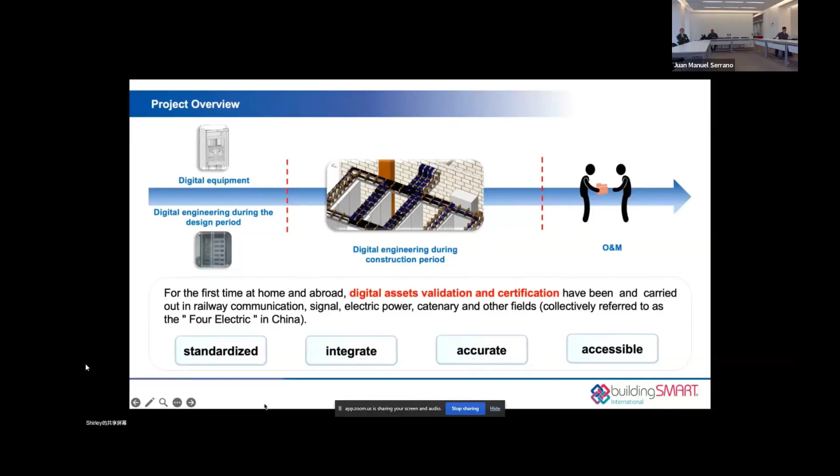As I mentioned before, standards are the core element, so our pilot project is based on various standards such as the ISO 19650 series standards, ISO 16739, and other openBIM standards, and also national standards.

Now let's move on to the second part, openBIM outcomes. Our pilot project has brought four main outcomes.

First, we established a digital assets validation and certification system. Second, we digitized a series of standards to facilitate the detection of digital assets. Third, we developed a validation system supporting automatic validation of IFC format models and information. And last, we developed digital assets handover and application based on the COBie standard.

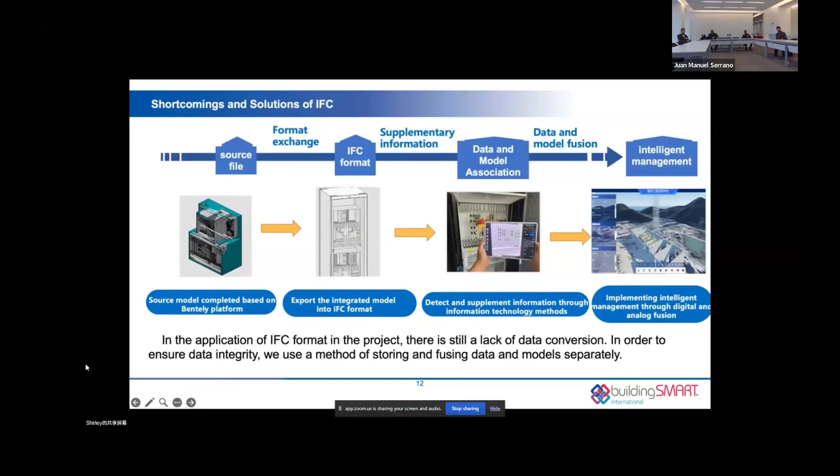For the second outcome, we have digitized the standards within the system. We organized the standards for entry and developed standards management software. This software is authorized by the NCA. Digitized standards are the basic core of the validation system, and this helps develop the automatic validation platform.

Yes, that's how it works.

We have already extended thousands of entries in 4 standards. These extensions perfect our standard system. And here are details of the entries we have digitized.

Well, the third outcome. Here we use IFC format as transmission format, transferring other format models into IFC. After that, we have developed a digital assets automatic validation platform based on IFC standard. This validation platform consists of laboratory and on-site.

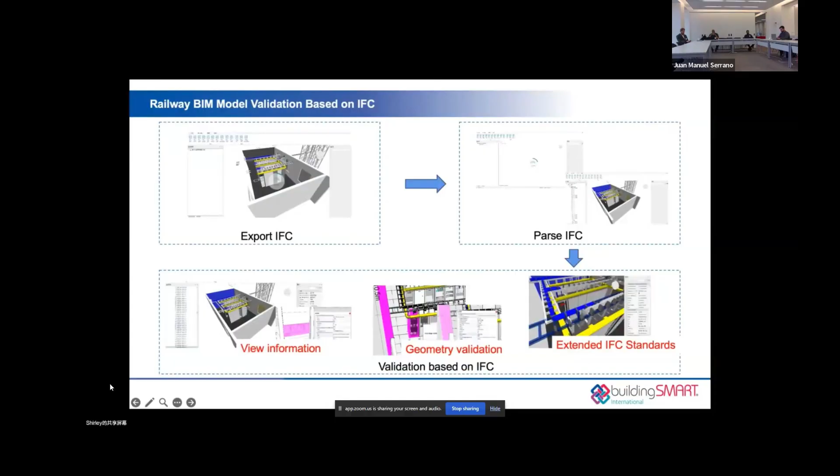Self-developed IFC model parsing function extracts the data information to be detected from the IFC format model. After parsing data from the IFC model with our detection function, we detect this data and provide the inspection report.

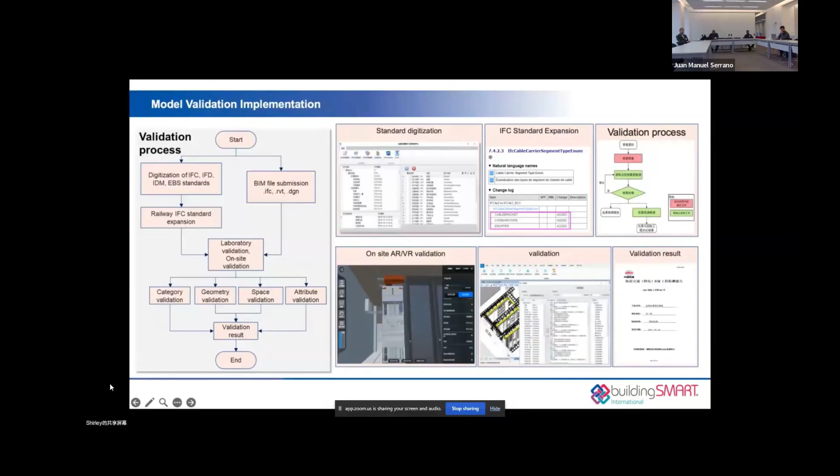Here's a flow chart of the validation process. There are 2 validation platforms, laboratory and on-site. Through these 2 platforms, we can detect digital models in 4 dimensions, such as category, geometry, and so on.

In this pilot project, we have validated and certified 4 digital engineering and 4 digital equipment, and these results are all approved by the Chinese government. These pictures show the results we've achieved.

Now let's move on to the handover and application. This is the handover process chart. When the owner initiates a commission, the certifier and validation party will help the owner detect the certified party's digital assets. Through this process, the certified digital assets will be accepted by the owner.

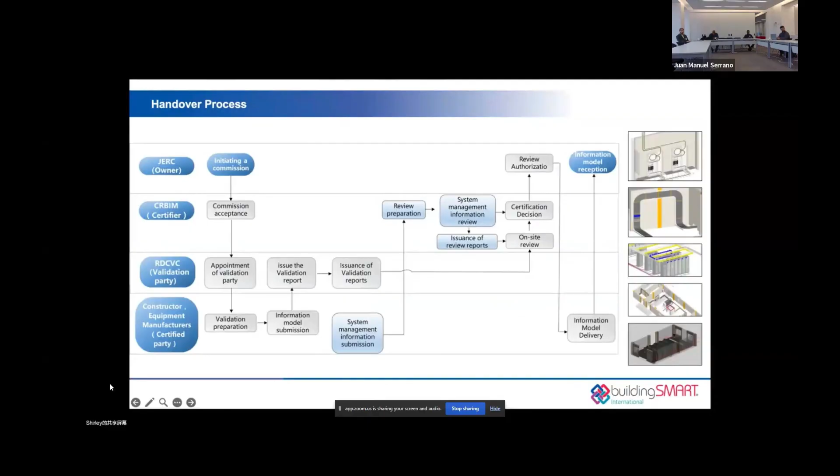In this pilot project, as delivery of digital assets, there are not only digital models, but also 56 digital engineering model drawings, and over 80,000 pieces of digital asset information included. This innovative delivery set helps engineers get key requirements or information more efficiently and accurately than in the traditional way.

So based on the certified digital assets, we have developed an electricity O&M management system. Many functions have been developed. Maintenance personnel can check relative digital data and manage equipment through this system easily. It reduces the cost of device management and improves efficiency.

In addition, based on COBie, static and dynamic data are all related to digital assets, making data visualization possible. Thanks to AR and VR technology, we developed an on-site validation system, and this system also helps our construction and maintenance personnel check hidden engineering easily.

And that is all my sharing.

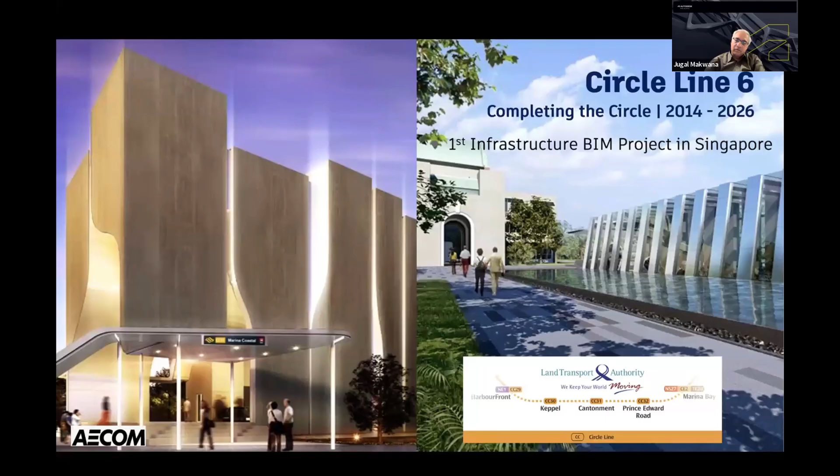Over these years, I've had pleasure in working on some of the largest projects. One of my first interesting BIM projects was way back in 2014, a project in Singapore. It's a small underground metro project with three new stations, but one of the most challenging projects in a way that the sheer complexity that the project had in the underground utilities and the stations, and the fact that each of the tunnel segments were different.

Getting a lot of feedback. Sorry, we had some feedback, but we've muted the source. Perfect, perfect. No worries. Thank you.

Although let's say it was only a 3 kilometer project with three stations, it had close to 110 models, and the information modeling and management was being done in 5 different countries. So quite an interesting challenge.

One of the largest probably was the Singapore Malaysia high speed rail project with a huge station at either side, and then a significant linear infrastructure as well. So this rail project is very complex. Like when you're building a station, you're building a kind of a mini township in itself.

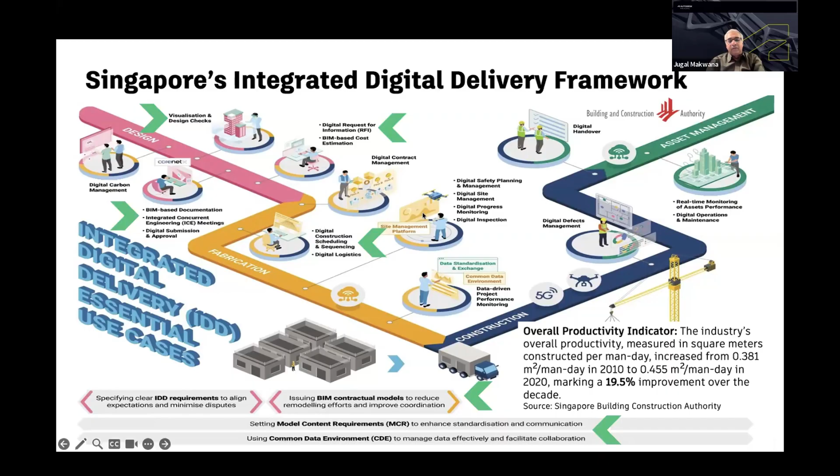All of these were kind of interesting pointers, which I took into the transformation program that I was leading in Haskoning, a consulting firm headquartered out of the Netherlands, where we said we have to make the ISO 19650 as the standard. One of the core principles in the organization's journey was having open BIM and IFC integrated as a core principle in the transition. That is where we feel that it adds value.

Back in 2014, I must confess that IFC back then 2x3 did not have the kind of support for linear infrastructure that IFC 4.3 currently has.

Some of the things, and I'm sure many of you would be living through this, what we see from a rail perspective, it is a unique discipline when compared to others, because in rail our different disciplines see things differently. Some see in geometry, some see in schematics, where drawings are still the kind of default currency in majority of the world. And that is where information modeling ends up being purely a model standpoint, not an information model that we want. And because of that, there isn't a lot of consistency in the way how things are done.

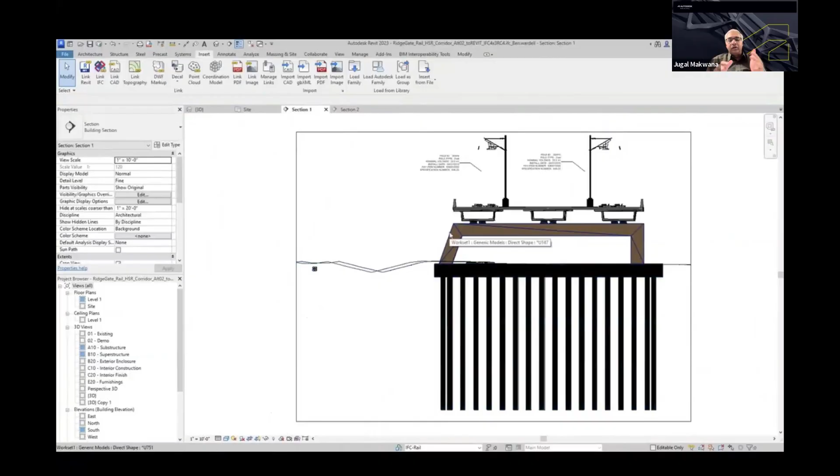Because you have that information in Revit or Civil 3D, you can use it from an annotation perspective or extract it for documentation and reporting. IFC also supports much better geolocation, which can be used to better coordinate the linear and vertical assets - the track as well as the stations and everything else. The support for openBIM and the standards goes beyond Revit and Civil 3D, but also ACC as well as Navisworks.

If you look at the typical IFC or openBIM workflow, this is what it looks like. With the openBIM workflow, IDS is where you define what information you need. IDS is kind of a digital version of the BIM execution plan where you capture things at a granular level. Then you use Revit or Civil 3D to create your data, which can then be exported in IFC or whatever form you want.

You can also use Navisworks and BCF to review, and then use ACC or even Forma to deliver what you want, either as IFC or a native format. Someone earlier had a question about how to validate. Building Smart also has a validation service, where you can validate if the IFC has the information that you need.

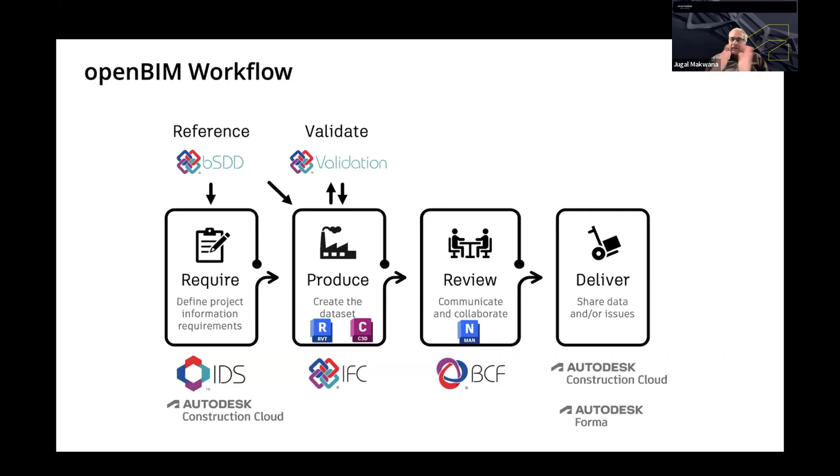What's also interesting is that it's not just what Autodesk is doing, but because of ACC being a wider platform, some of these integrations have also expanded, and other partners are doing some of that integration. Let me just play this. This has audio, I'll take a pause for a second.

OpenAEC for BSDD is a plugin for Revit and Civil 3D that allows you to connect to a BSDD. Once applicable objects are selected, insert your desired IFC entities, attributes, properties, and property sets. This free plugin allows you to easily manage properties in the native model and set up model parameters for predictable export to IFC. It maps IFC properties and Revit parameters by automatically authoring a shared parameter file. The same workflow is also available as a plugin for Civil 3D. OpenAEC for BSDD also allows you to enforce data requirements defined in an information delivery specification file to native models. Set the import target by selecting the applicable Revit objects. Set the properties and attributes defined in the IDS before automatically creating a shared parameter file and importing.

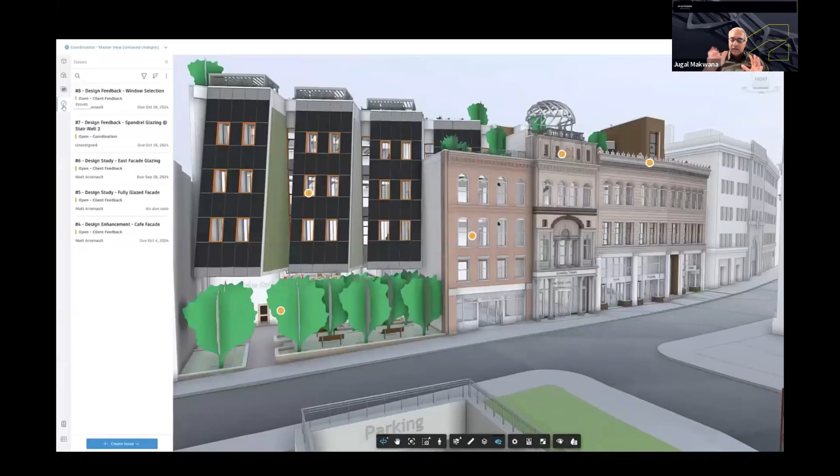This is one of the plugins available for ACC where you can create a BSDD as well as an IDS, which can then be used in validation.

This is an example of how BCF has been integrated with ACC as well, where you can export BCF, which is a coordination standard, and use that within ACC to bring in information from multiple disciplines and multiple technology sources using BCF.

So these are some of those examples, and Autodesk in a way has been one of the founding members of Building Smart International. We are still strategic advisors and a strategic member of Building Smart International, and our support for the openBIM standards is widespread, so 2x3, 4, and even 4.3.

What's interesting is that some of the newer platforms like Forma, which was announced earlier at AU, already supports IFC and openBIM standards. What we are working towards is to ensure that everything you do provides the right quality, is flexible, and is consistent, not just locally but globally.

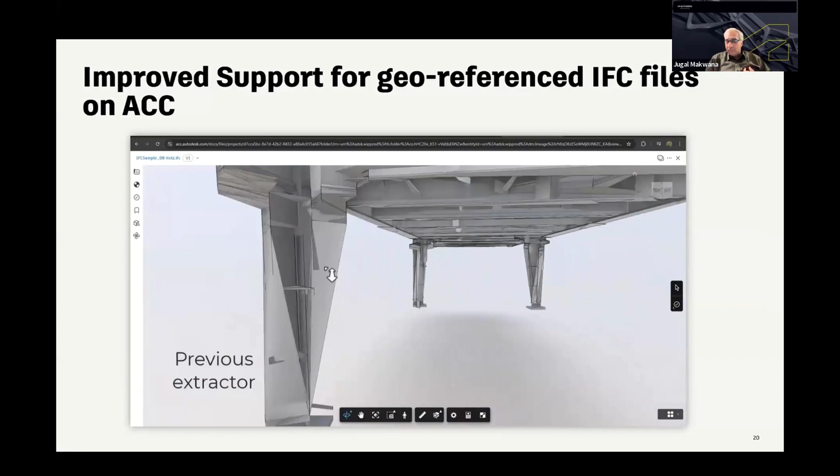They're also looking at improving the quality. So this is the IFC extractor, which was 2x3, but with 4.3 and the additional georeference support it has, the newer IFC and support in ACC is much better. You can see the difference in the way the extractor delivers and the quality you're able to achieve. The speed again is much faster, and there are significant enhancements being done.

There's a whole presentation which was done at AU on openBIM workflows for Autodesk, which is most likely available on one of the Autodesk portals for you to see, and I'm happy to have a deeper dive with the technical team on how some of these things exactly work.

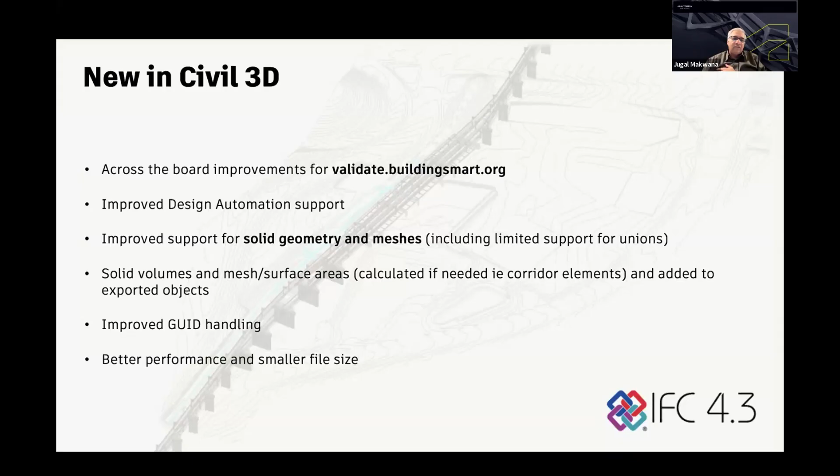There's also significant investment in IFC from a Civil 3D perspective. You should definitely explore the validation platform that Building Smart International offers to check the IFC you're getting and its quality. I think Civil 3D and Revit are likely to be among the first platforms certified for IFC 4.3 and the way they handle it, and some platforms like Forma already export IFC 4.3.

And imports as well. So if you're using Forma and want to import an existing model, you can actually bring in IFC as well as Revit. And the roadmap kind of continues, with a lot of enhancements and developments likely to happen.

One of my colleagues, Angel Velez, who's a fellow at Building SMART International, is responsible for implementing IFC in Revit. He's also now part of the standards committee, driving to ensure that the interoperability and integration of IFC is by design and a lot more proactive.

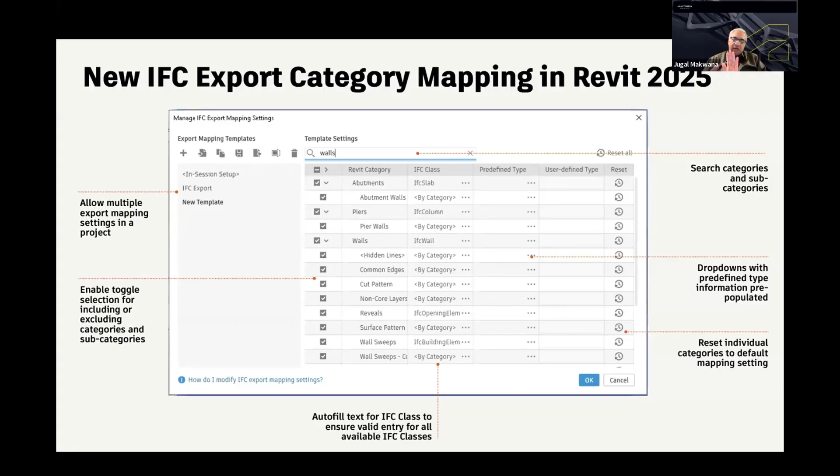So you should see more features and functionalities which allow you to do category mapping in Revit through Excel and the data dictionary, as well as provide a custom property set so that, for example, your overhead line would have a custom property set, your track would have a custom property set. You can start modulating and adding those custom property sets to elements so it doesn't become one monolithic document.

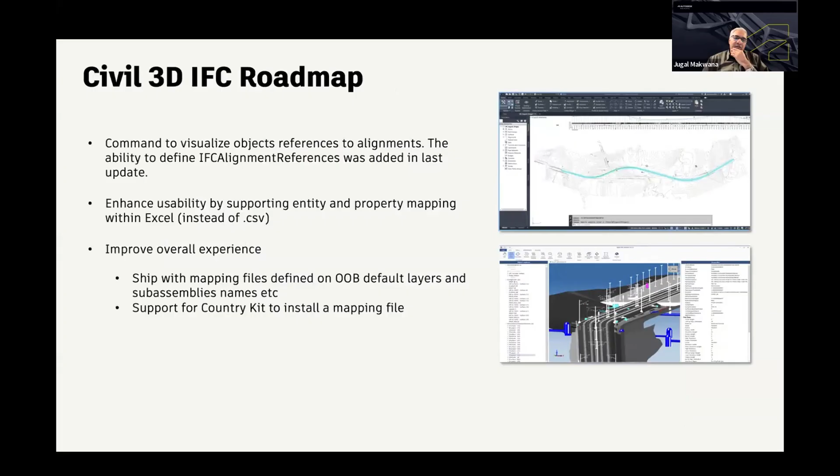There are lots of interesting things happening. There's also support for Excel-based mapping that's coming, as well as country kit support. And now available on all ACC projects is the data exchange, which can help you granularize the IFC.

So let's say you get a whole monolithic IFC with all the disciplines in it, but you say, okay, I just want to create an IFC which has my tracks in it. You should be able to do that with the data exchange and say, can you extract all the tracks and package it as a separate IFC? So you can do that.

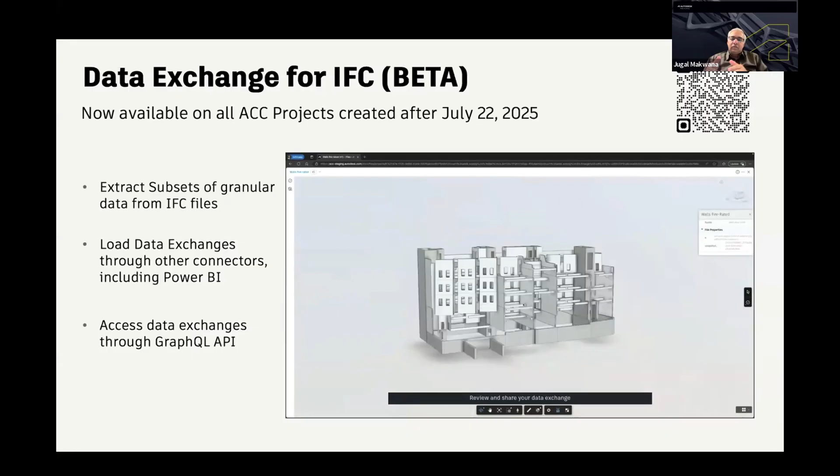In this case, let's say they're doing it for structure or mechanical. You can actually extract and create subcomponents of those IFCs, which can have that dependency, and then use it in whatever technology you want—bring it into Revit or Civil 3D, whatever you want to do, you should be able to.

One of the pivots Autodesk is now focused on is ensuring everyone has access to that granular data, and that's where the whole AEC data model is being configured, where the data dictionary or BSDD is also one of those foundational pieces that offers custom Revit properties embedded in the AEC data model, where you should be able to assign additional properties.

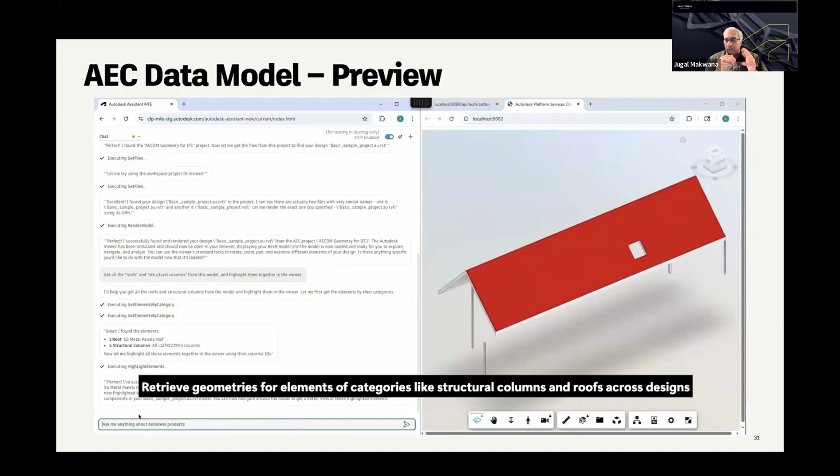With the advent of large language models, you should be able to, within ACC as well as Forge, with the Autodesk Assistant, have a conversation with your models—whether those models are in IFC, Revit, or Civil 3D format. You should be able to have a conversation and use it to check and validate, does this have these properties, or what properties are missing? So there are additional ways to interact with the information model, and then again export IFC.

Instead of doing it through the UI, you can just type and say, can you extract this? So there are lots of possibilities that granular data brings in, and that's what brings us to IFC 5.

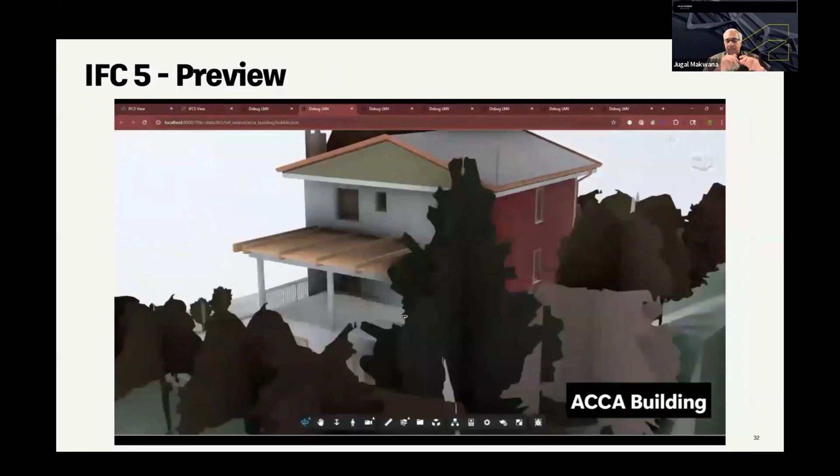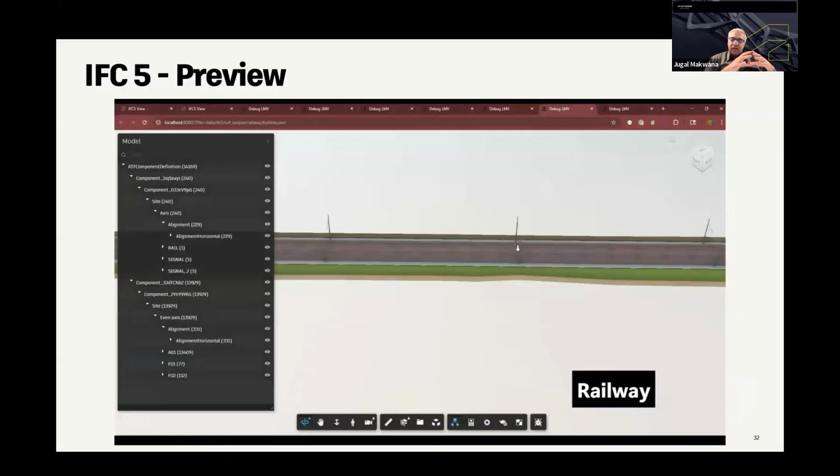IFC 5 is a more granular, cloud-based data exchange, based on IFC 4.3, but modular, allowing us to exchange data on the cloud without actually having to create an IFC. That's quite exciting, and should become the norm for cloud-based collaboration going forward. For desktop-based work, when an owner needs an IFC as an exchange for archiving purposes, that would still be available.

And all of that leads to the whole AI side, wherein once you have that granular data, you should be able to use one of these assistants to query them—say, can you help me analyze this track alignment, does it comply with the New York MTA standards? You should be able to do all that validation and then export and import IFC or whatever. There are some very interesting functionalities being enabled, and granular data is at the core of it. IFC and openBIM will play a much bigger role than what they're playing now.

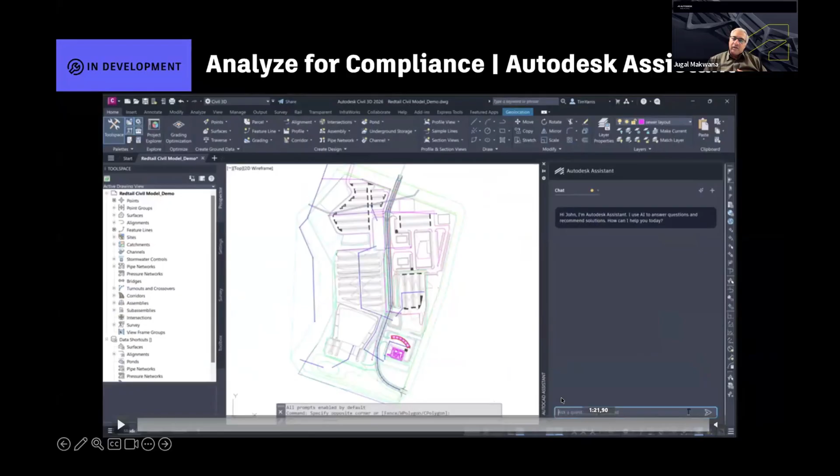So whether it's for compliance and checking and all of that, there's some very interesting developments likely to come. One area is point cloud - IFC doesn't support point cloud and doesn't need to, but there are AI and machine learning capabilities available in ReCap that can now extract rails, create your gauge, and understand your cant, which can then be directly brought into Civil 3D. These are aspects of strategic model delivery or information model delivery from a rail perspective. Once you have this in Civil 3D, you can export it as IFC for sharing with the wider stuff.

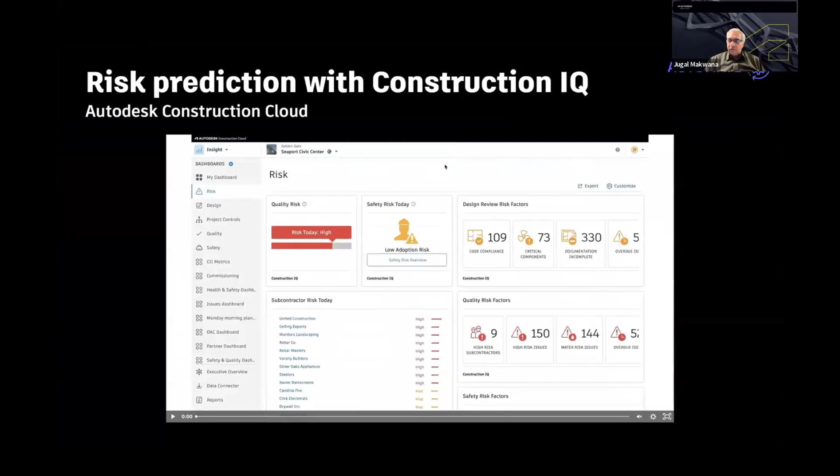There are lots of new developments and enhancements likely to come from an MCP perspective for Civil 3D, which would help further integrate and interrogate these models with other tools and technology. A lot of these enhanced, interesting developments are likely to be based on granular data. If you have IFC, you can bring it into ACC, put it in those specifications, have a conversation with it - understand risk, and a lot of that can happen. The bottom line is we are transitioning from static file-based collaboration to granular data-based collaboration, and you should see more tools and technology enabling that data-driven interoperability.

And it's not just interoperability from an IFC perspective, but there are other standards - OGC as well as ODA, ISO. I'm actually speaking at DEXPI, the data exchange in the process industry, where they're looking at integrating BIM and process work. So it's not just IFC on its own, but the whole open BIM workflow, as well as connecting OGC, the geospatial standards, with our BIM standards, so that from a rail perspective both are equally important. So the GeoBIM integration is also important.

All these organizations, whether Autodesk, Nemetschek or Bentley, are investing in cloud-based platforms, so we need cloud-based collaboration and interoperability mechanisms too. Going forward, all of these platforms will be open and extensible, becoming more data-driven, giving you the flexibility to unlock the whole data and its granularity, and use AI and invest in standardization and visualization of all of that. In future, as we transition from a document to a data-driven industry, we need to look at how we make it accessible, connected and usable, and open BIM and IFC will be an integral part of that journey.

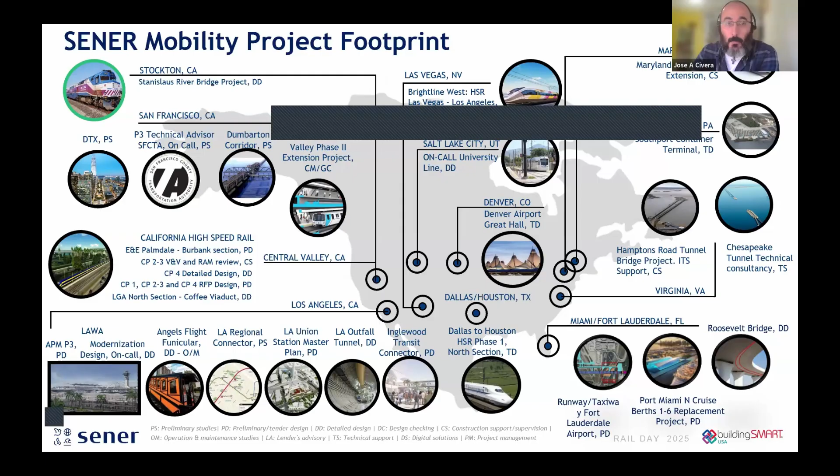Okay, if we talk about BIM implementation, well, we have been working with BIM tools since 2008, but only for modeling until we reached 2012, where we had BIM model development at a higher level. Then we moved into BIM management in 2014. And in 2017, we started BIM implementation with the creation of the SENER BIM office. Also in this year, we joined the Building Smart Spain chapter.

We are partners on the Building Smart Spain chapter, with several collaborations and participation in some of their activities. We have experience with BIM data management and system integration. In 2022, we were certified in ISO 19650 as lead appointed party. In 2024, we implemented ACC as our main CDE for the projects, and when we can decide the CDE, it is the one we use. Then in 2025, we recertified our ISO 19650 certification, now as lead appointed party and appointed party.

Now that you know us, I will introduce our client in this project. Our client is ADIF, the Spanish Railway Infrastructure Manager. ADIF is responsible for the design, construction, supervision, and maintenance of the rail network in Spain, and is one of the biggest public companies in Spain for infrastructure.

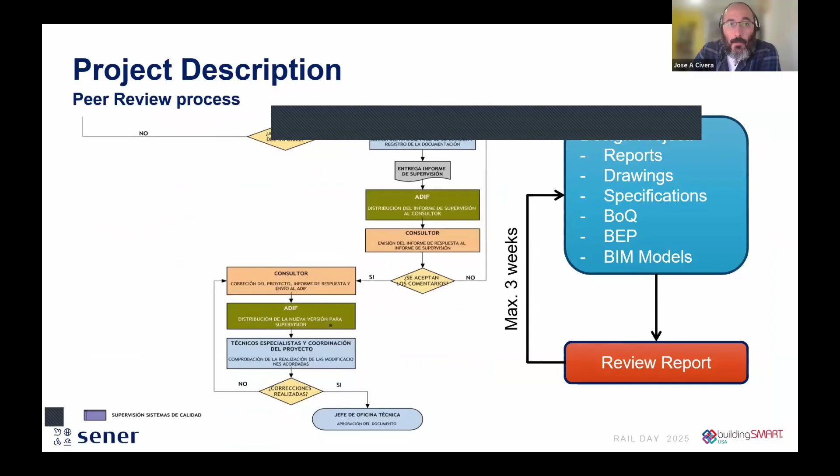I don't want to get into much detail, but this is a short sketch of the different steps during the revision. Mainly, we receive a design project with report, drawings, specifications, BOQ, a BIM execution plan, and BIM models. We have to review it and provide a review report back to the suppliers.

Moving into the BIM deliverables review: part of the project is the technical review done by the technical team, and part of the peer review is the BIM deliverable review done by my team.

First, we receive from the supplier the first version of the BEP, the project, and the exchange information requirements used for its development. We must account for the fact that ADIF is in an implementation process and their standards have improved, so we need the specific version of the standard used to prepare the BEP. This documentation is shared with ADIF, and ADIF shares it with us on their CDE, the ACC, where we check if the documentation is ready to be reviewed.

If not, we come back to the supplier. If this is ready to be reviewed, we start the process. We develop the BEP review process and prepare the report, then come back to the supplier. After one, two, three rounds, we have the BEP approved, and then after that we can start receiving the models.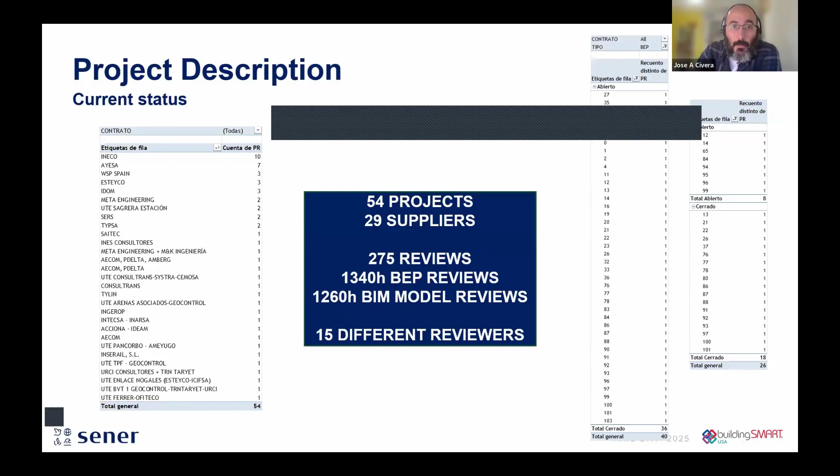Okay, now I will explain the ADIF BIM documentation framework, which is the basis for this project. As I said, ADIF is in the BIM implementation process, and they have developed their BIM frameworks.

This framework refers to a set of rules, standards, and procedures developed by ADIF to define the BIM implementation in the different projects. This framework is key for the standardization of the project, which is key to explain the process that we have implemented. And the primary goal is to enhance collaboration, efficiency, and quality in the management of the ADIF infrastructure projects.

They have three main columns supporting this framework. The first is the BIM manual for BIM implementation, then the BIM style guide, and third, the specific guidelines for BIM uses. I'm not going to go into much detail, just let you know that, for example, for the BIM manual, they have documentation, public documentation for the suppliers that covers BIM terms, introduction to BIM, BIM in project phases, in construction phase.

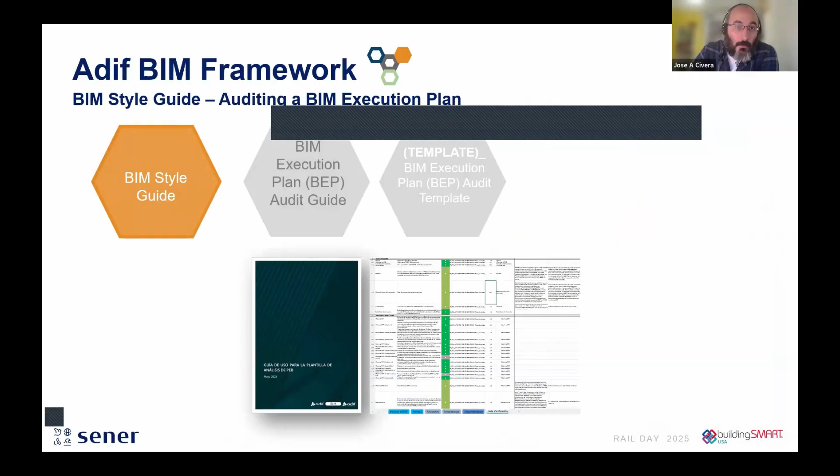We'll explain that to you more in detail later. Also, guides for the data generation, for the IFC generation from different software, also for coding. There are a lot of guides for the CDE, for the uses, the BIM roles, the guide for all the folder structure that must be used in the project, also for the file coding system, etc. Everything is standardized, the standard.

And the third column was the specific guidelines. They have developed specific guidelines for all the BIM uses requested in the projects, for documentation, collaboration, 4D, 5D, sustainability, etc. They have a lot of documentation that can be used by the supplier.

Okay, now explaining more in detail the review process for the BEP, for example. The supplier elaborates the BEP and the different annexes that are requested by ADIF, and this documentation is reviewed against the ADIF BIM frameworks. This BEP has the main document and different annexes.

They have mandatory requirements to have a master information delivery plan, a BIM project manual, attribute matrix, model mockup, which is a mockup of the models that they have to provide during the BEP development to prove that the supplier knows how to coordinate different models from different software in one federated model. Also they have object classification, file naming convention, etc. All these annexes are mandatory by ADIF and are part of our review.

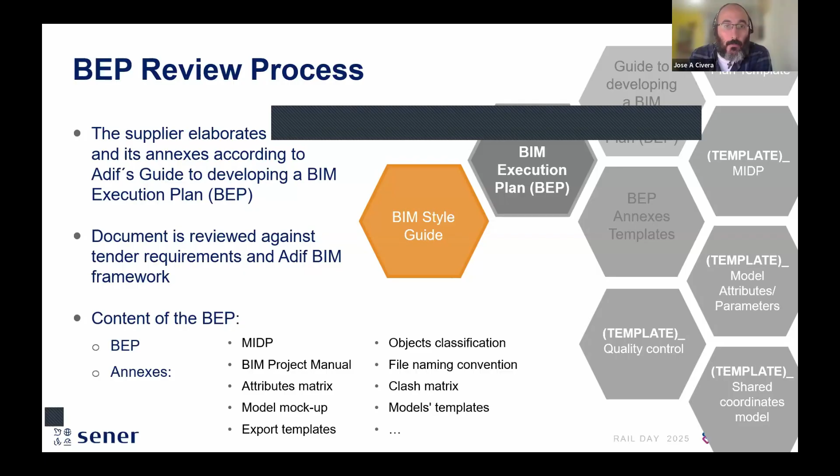The review takes into account 123 items to check, some general comments and some specific ones, organized in different groups that you can see there, for example BEP structure, BIM strategy, quality control, etc. I don't want to spend much time on this.

And what we need to do is to evaluate each one of the items on a rating, saying if this is a pass, no objection, if there are comments that should be attended, if it is failed, which means that this point is not aligned with the requirements, or if this is not applicable.

Okay, the BEP review process, as per our experience, we have limited room for automation. What we are trying to do is to compile typical comments or typical non-conformities, so we will have a first version of the report already with the responses that we will have. We try to share, of course, our previous audit reports with all the teams so they could take that into account. And also we are taking some action with ADIF to try to improve some of the checks that we have to take into account.

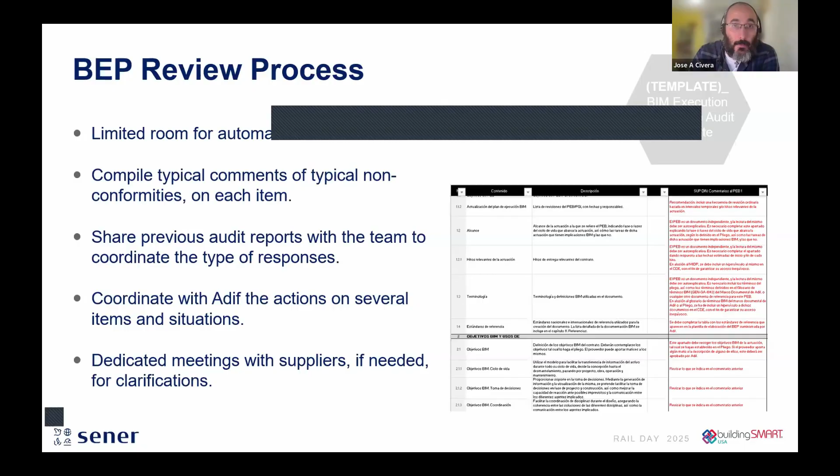If we move into a model review process, which I think is the most interesting point, the supplier needs to elaborate the BIM model according to the previous BEP approved in the previous stage. In the review, we need to check 65 items, 21 stated as critical and 44 stated as non-critical.

The checks are grouped in different subgroups: one for general requirements, other information on files, geometrical checks, information on objects, interoperability with IFC, 2D drawings, 3D coordination, 4D simulation, and 5D bill of quantities.

Each group has a maximum score the supplier needs to get, but this is now under review because this score is going to be removed at the end. All the checkpoints need to have a positive evaluation. What we do is go through the audit checklist to check all the points and provide a rate: approved, not approved, or not applicable. And again, this is under review right now.

Okay, and what is the process that we have used to review the BIM models? We have done four different scenarios that have been evolving during the development of the project.

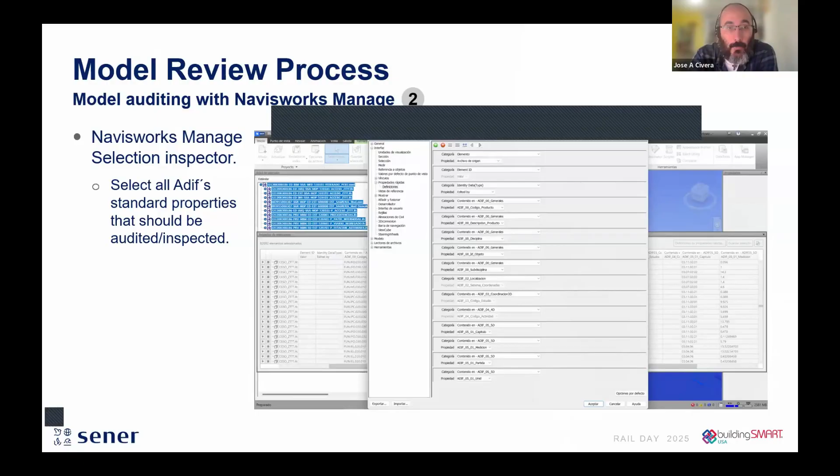Then the next step we took was to start using Navisworks Manage as the tool to make the review. We prepared a selection inspector in Navisworks Manage, where we defined all the different parameters that ADIF requests in their frameworks, and with that we extracted all the data from the federated model.

This federated model is done using the IFC models of the different disciplines. We export all the selections and get all the object information into an Excel file, with which we could check in more detail the different objects that have the parameters, and whether the parameters are correct or not.

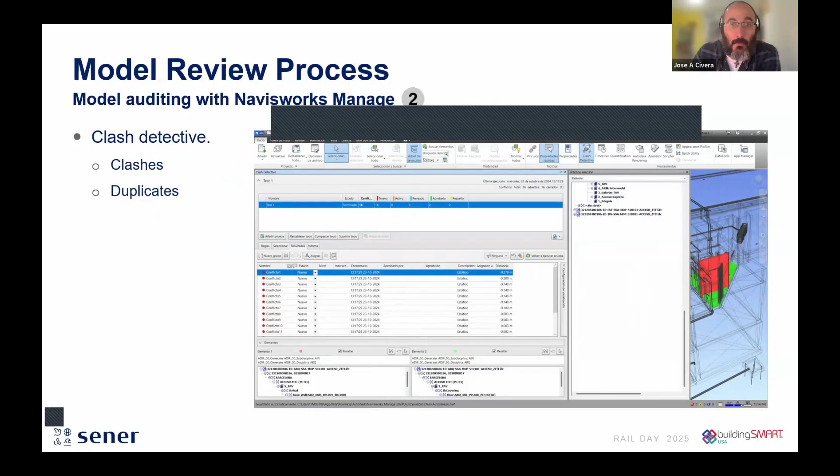We also use Navisworks to detect clashes and duplicate elements, which are part of the review. This process is, of course, more accurate. The Navisworks configuration is shared between the different teams, and the clash analysis is easy to obtain.

In this stage, the deliverables were an Excel file report and some indication about specific objects. We give the supplier some indication - instead of saying there are elements without the parameters, we started to say, okay, the elements of this model are wrong, or they don't have the parameters, or things like that.

The third step was using BIMcollab Zoom. When we started the project, around six months in, we had an internal discussion in the team to try to organize and automate as much as possible this process, because we knew we would have a lot of projects to review.

Then we analyzed each one of the checkpoints of the audit list, and we defined which ones could be easily automated and which ones not. We concluded that 26 of the 65 items could be automated.

10 of them are critical. The critical checklist status only affects the rate the supplier gets during the review, but finally all the points need to be approved, so in the end it doesn't really matter. But we started to define different checks that would be automated.

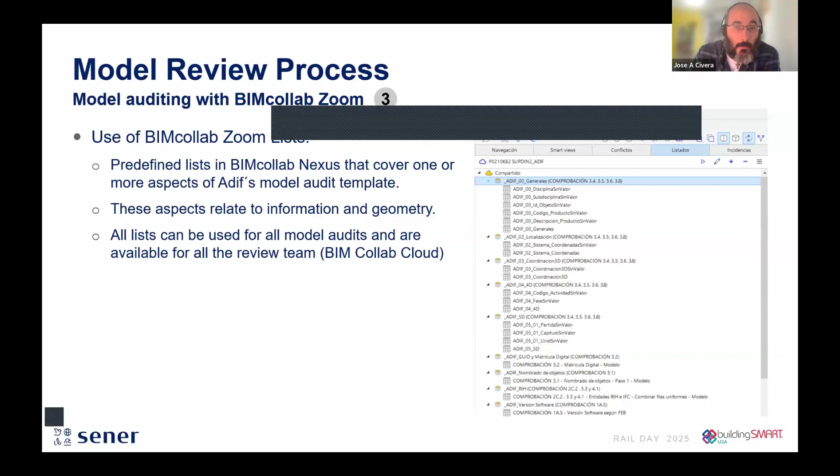We have some lists ready to run on the federated model to get, for example, all the general parameters required by ADIF. We have all the different elements with each column showing the value for each parameter. The same with the coordinate system for the different files, for 3D coordination, and for 4D, to check if all elements have the 4D parameters to be used during construction simulation, as well as for 5D.

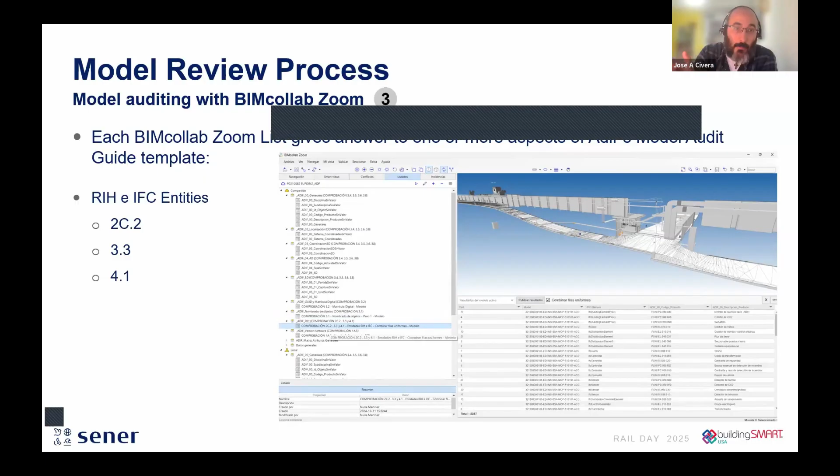ADIF also requires all objects to have a unique identifier inside the project, so we check that all objects have a unique ID. For object naming, ADIF requires that all objects have the discipline dash the object, things like that. We also check that the Rail Innovation Hub classification is properly assigned, which dictates the classification number, the IFC type, and the IFC description. This is checked with this process, along with the IFC format used, to verify it's aligned with the BEP.

What we do is export all those lists into Excel, where we already have templates to upload this data. We can easily check, for example, if we've received all the models stated in the MIDP and BEP, and that the codification matches exactly. We have one template to get all the data aligned with the Rail Innovation Hub, and we can automatically identify which objects don't have the proper IFC description or IFC type that should be implemented.

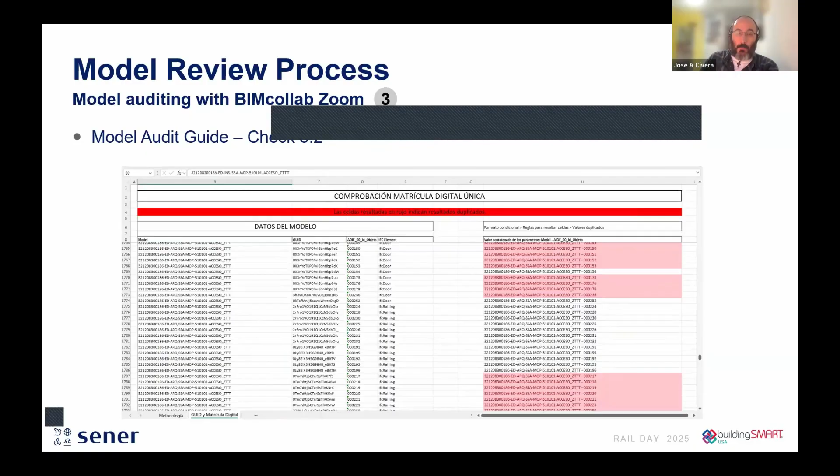The same goes for naming convention - we automatically detect if objects are properly named or not, and if we have duplicated unique IDs for objects, since these unique IDs are assigned manually by the supplier. ADIF is not using the unique ID of the IFC object, so we need to check that this is properly assigned. With this process, we have a more accurate audit process.

We have standardized with all the teams, since we have everything shared in the cloud space in BIMcollab. We have more checks automated during this process, and what we deliver to the supplier is the Excel report file, plus auxiliary info in Excel format for all the different checks that have been automated. This helps speed up the supplier's revision process.

With this, we are checking all the objects in the model, not sampling - we're checking all the information. We need to export the information to Excel format, of course.

I have to say that with this process, we have some issues when reviewing IFC 4x3 property sets and coordinates - in some cases BIMcollab Zoom isn't reading the files properly, but it's something we're managing with them. We're also having issues with large models with a lot of elements, for example a track model with thousands of sleepers. We get issues exporting that information into Excel because in some cases the software isn't fully compatible with so many elements.

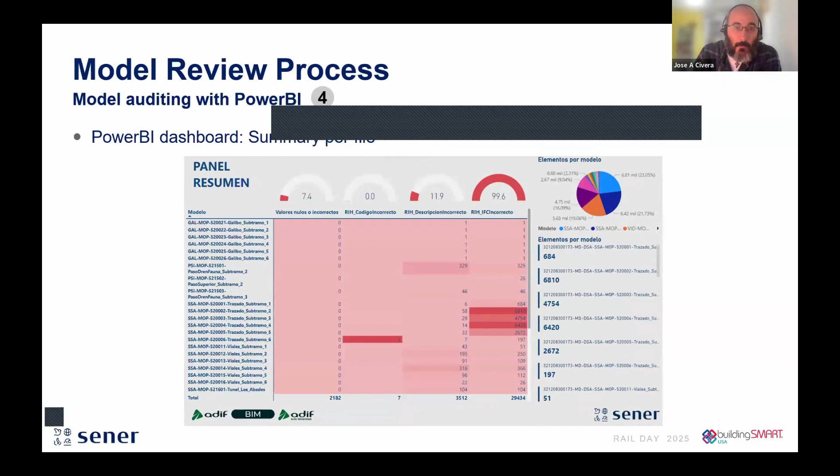This information is an additional step to the review process, more accurate, more simple. We don't need to make exports.

Power BI shared in a SharePoint, internal SharePoint, so we can publish to the suppliers so they could check the information directly there. Now we are getting additional checks automated compared with the previous process, and the deliverables are the Excel file, which is the contractual deliverable, auxiliary info from checking the model, and the access to the Power BI.

In this process, I have to say there are some issues with the Power BI dashboard sharing with external users, but it's something that has been solved. This has also been used for internal audit for Sener projects, because at the end it's the same process that we need to do internally for the projects that we develop for ADIF.

Conclusions: well, this process works because ADIF has really good standardization. If we didn't have this standardization, the automation wouldn't work properly.

Also, this audit is based on the audit of IFC files. Native files we need to check as well, but we receive native files from a lot of different software - Revit, Civil 3D, InfraWorks, also Bentley, also Istram, specific software - so we cannot have a standardized process for all the different native software that we receive.

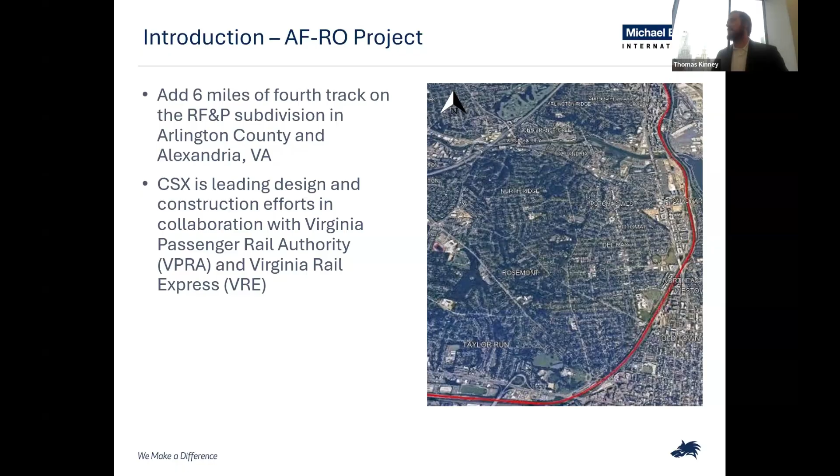AF to RO is six miles of 4th track on the old Richmond, Fredericksburg, and Potomac subdivision in Arlington County and Alexandria. I will also be covering Franconia to Lorton, which is close to this. CSX is leading design and construction efforts in collaboration with VPRA and VRE, as I mentioned.

Our construction activities to be coordinated include adding a 4th track between AF and RO interlocking, and once again adding 3rd and 4th tracks between Franconia and Lorton as well. Upgrading AF, Slater's Lane, and RO interlockings along this corridor. Then replacing a pair of...

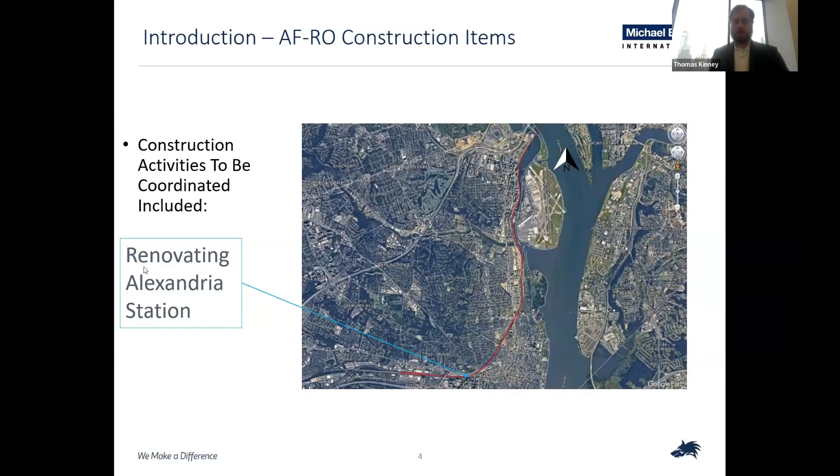Here's my screen, it's frozen. It's not moving. Try to share again. Stop sharing and share again. Oh, good. Try again, just one more time. There we go.

Continuing on, part of the construction activities include replacing rail bridges over King Street and Commonwealth Avenue, two major arteries in Alexandria, Virginia, and then renovating Alexandria Station, and reconstructing the station in Crystal City, putting in an entirely new Crystal City station.

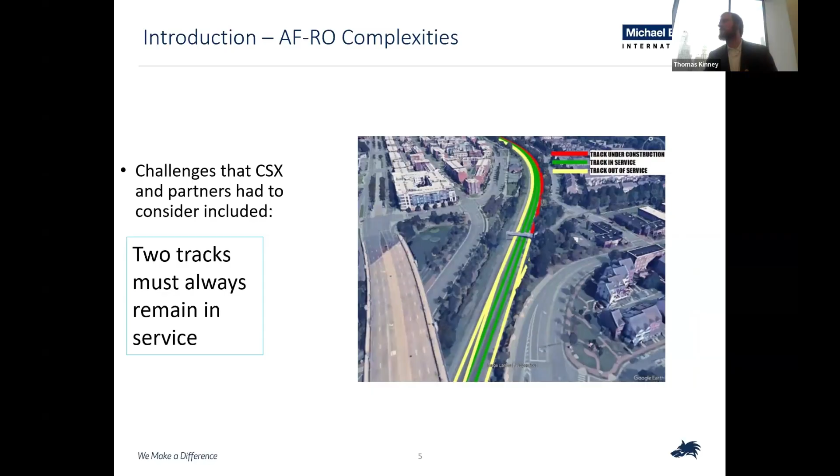Challenges that CSX and its partners had to consider included the fact that ideally two tracks would always remain in service to maximize the amount of traffic during construction. So while we have the other two tracks under construction or otherwise out of service, we wanted to keep at least two in service at all times, which proved difficult because part of putting in the new 4th track required us to shift around the other three.

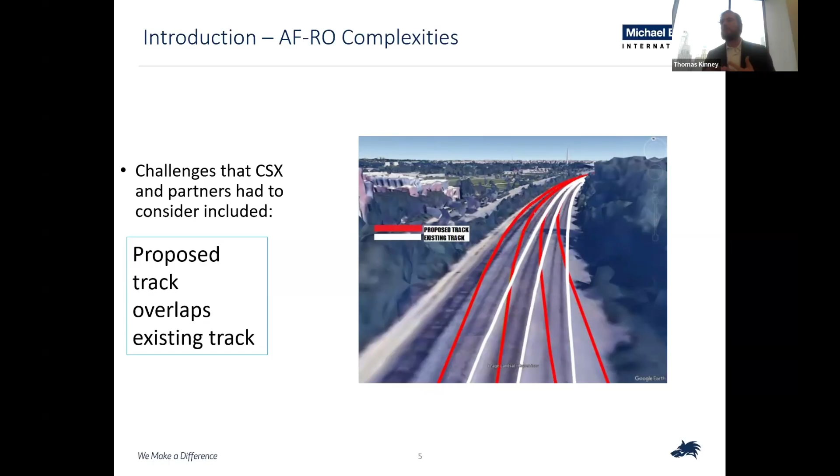We also wanted to keep two platform edges available at the stations whenever possible, again to maximize passenger traffic when possible. The track and civil work were going to happen concurrently, so we had to safely and efficiently replace the bridges while also keeping tracks online and road traffic underneath the bridges flowing smoothly, minimizing bridge construction times. All these challenges were compounded by the fact that the proposed alignments overlapped with the existing alignments, meaning construction of new rail would require the shifting of old rail.

So a multidisciplinary team was formed with the following goals: produce a construction sequence for the AF to RO corridor and also Franconia to Lorton, use existing information technology, and leverage 4D building information modeling software. For the case of these projects, that software would be Synchro 4D. Building information modeling was to be used to provide real-time visualization and workshopping for this project.

Unfortunately for AF to RO, several external time factors affected full incorporation of 4D BIM in the project, but the system was still in development. As I'll talk about later, we're in the process of fully realizing this for the Franconia to Lorton stretch. So the workshopping fell into three facets as we developed the project. We had finished design files from a different firm that we used to construct the phasing plan, and we did the bulk of our workshopping in almost a proto 4D modeling software - it was OpenRail Designer, but we used saved views and a task tracker in combination to create 4D or proto 4D modeling.

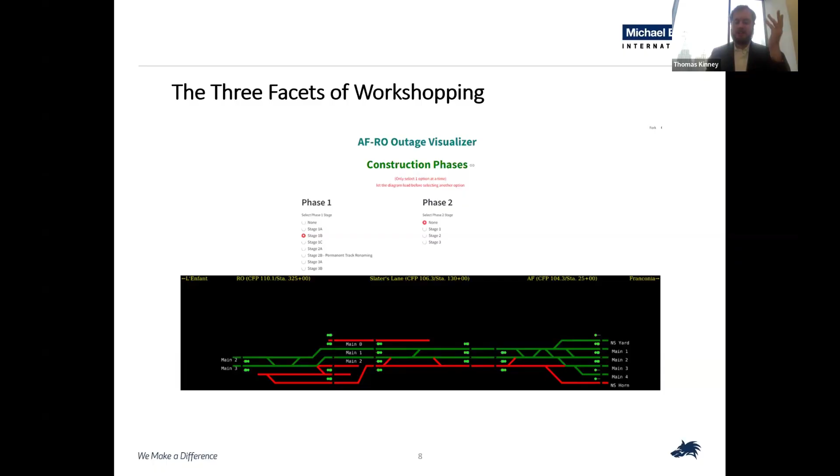Then after that, our construction services team came together and put together a schedule showing the best way to chart this path forward after we had workshopped it out with CSX, VPRA, and VRE.

First, talking about developing the construction schedule. We had major construction phases, task trackers, and OpenRail saved views. I'll show you how these OpenRail saved views work in just a minute as a Proto 4D software, work breakdown structure and activities.

So we broke down the work into what construction forces we would need and how much time, what construction forces we had and how much time they would need to perform the construction activities, and then sequencing the activities so that we could make them happen in a safe and effective way.

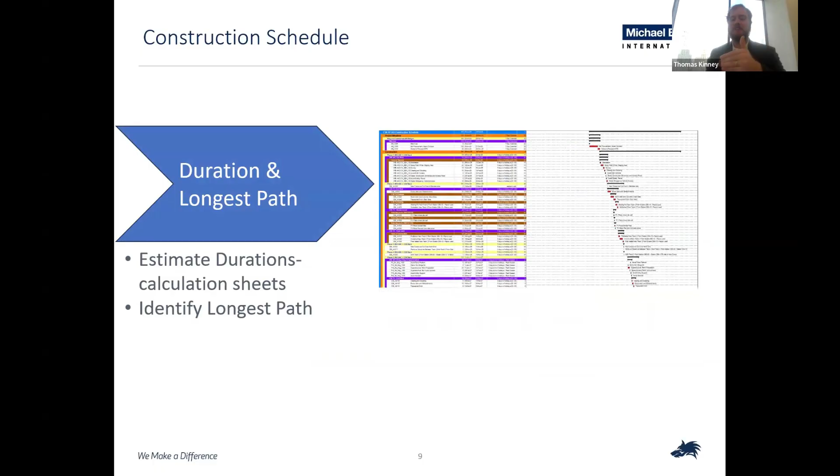After we calculated the durations of the different activities, we identified the longest path of everything that needed to be done, and that went into the schedule. We integrated stakeholder input as we were juggling 3 different firms who all wanted to do different things over the course of this project, and we put all of those activities into one plan to make sure we could execute everything as needed.

We identified where the different activities would conflict. When you're replacing the station and platforms, certain tracks have to be out of service so you can safely put in that platform. Certain tracks have to be out of service so you can install a pedestrian tunnel underneath the tracks, and so on. All of that would just go into the same plans.

Before we got into the 4D modeling, everything culminated into this phasing diagram that showed all the work in a given phase, which tracks were online, which tracks were offline, which tracks were under construction, and all the other construction activities that had to go into it as well.

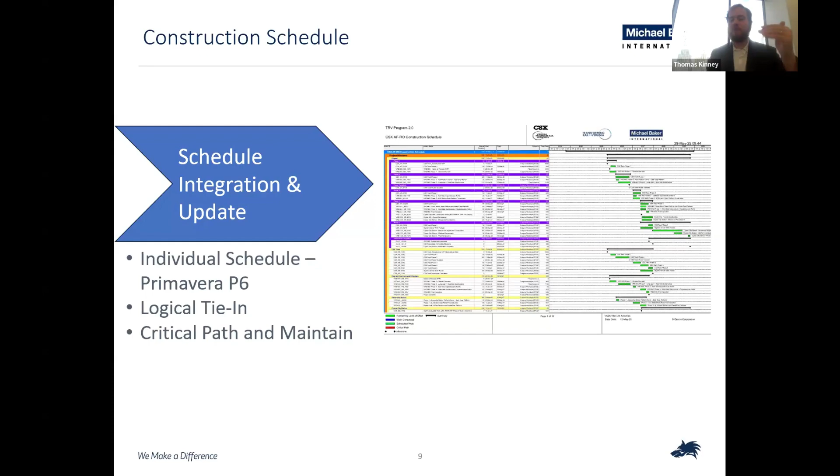The key milestones especially, and going back to the schedule and refining it. This was in Primavera P6, and we tied in everything that we needed to and found that critical path, and we maintained that critical path to the best of our ability.

Which takes us into that first approach of the software, the Bentley Saved Views and Task Tracker spreadsheets. Bentley Save Views are very convenient. You'll see on your screen here what we saw when we had the phasing open.

So we had a grand file that had all of the different phases in it. With Bentley Save Views, we could choose what phases were active in the drawing at the time, and even what lines were active within that phase, what levels. So we could very easily click on one of these.

We created these saved views, and we could set them however we wanted to. All you had to do was click on one of these, click on the screen, and it would instantly open up to that saved view in our proto 4D approach. That would allow you to show how either one spot changes over time, or you could walk down the line in one phase and see all of the major construction activities.

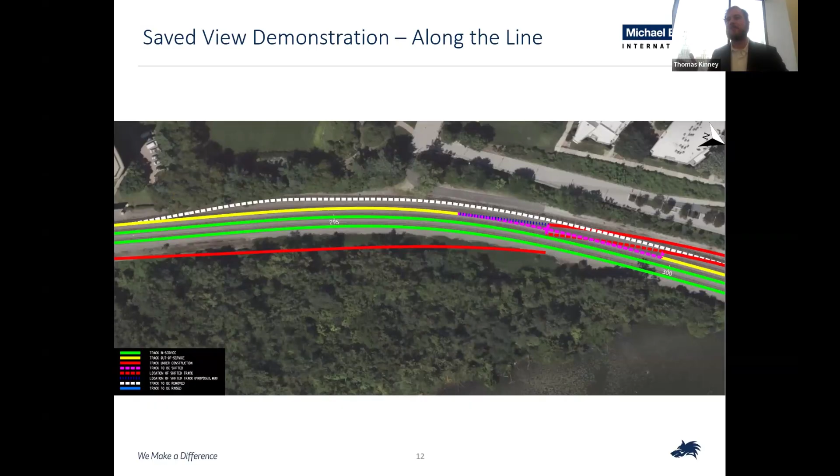Then onward to station 295, same thing. This is where a lot of the existing right-of-way overlaps with the proposed right-of-way. So we had to be very careful about phasing all of this to make sure that we could get 2 tracks online at the same time.

Finally, 315. This is right before Long Bridge and RO interlocking. Again, just more construction, more removal, and keeping those 2 tracks online.

I can also show you how the tracks change over time at one spot. So this is that complicated area where the existing and the proposed overlap quite a bit. This is phase 1.

Phase 2, you see we have some of the stuff shifted, some of it's still being shifted, and some tracks still offline. Phase 3, we're getting into some more intensive shifting there, but because of efforts in phases 1 and 2, we're still able to keep those top 2 tracks online.

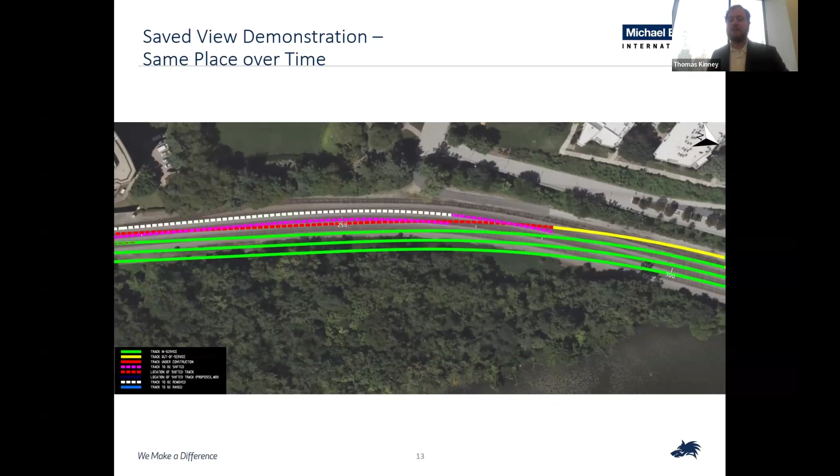Phase 4, again, shifting in the middle, but now we have 3 tracks online, which is even better. And phase 5, after that, all tracks will be online.

In our spreadsheet task tracker, each task was put into the spreadsheet, and each phase was a tab. As we went through the phases, you would see green, that activity is being performed; red was a conflict that we had flagged, so we might have to do some minor changes to the actual track plan to accommodate those; and yellow was something where a temporary outage was required on an active track. Going through the phases, as we performed more activities, they would become blacked out, and that made sure we got every activity we needed for the sake of the project.

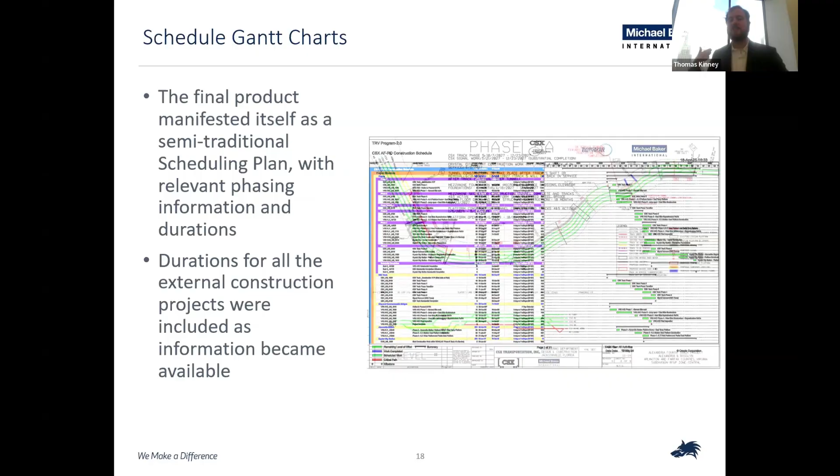Durations for all the external construction projects were included as the information became available. That was very closely tied to our schedule. We worked very closely with construction services to make sure that came together nicely.

Schedule Gantt charts: we integrated the schedule and had each individual schedule. We had the work breakdown structure, which we logically tied into every task that we had. And we had those critical path and interfacing milestones where we could see where different activities conflicted. That allowed us to establish a baseline and maintain it with regular updates. All of that was integrated into Primavera P6, which is very relevant to what we'll talk about with the actual 4D BIM modeling. Synchro 4D Pro allows us to import P6 schedules directly into it, allowing us to have everything under one platform, under one roof.

More of the Gantt chart scheduling, phasing all of these different milestones into one grand scheduling, which allowed us to plan.

While it didn't happen for AF to RO, we had much the same approach with Franconia to Lorton, just on an accelerated scale, now that we knew what we were doing.

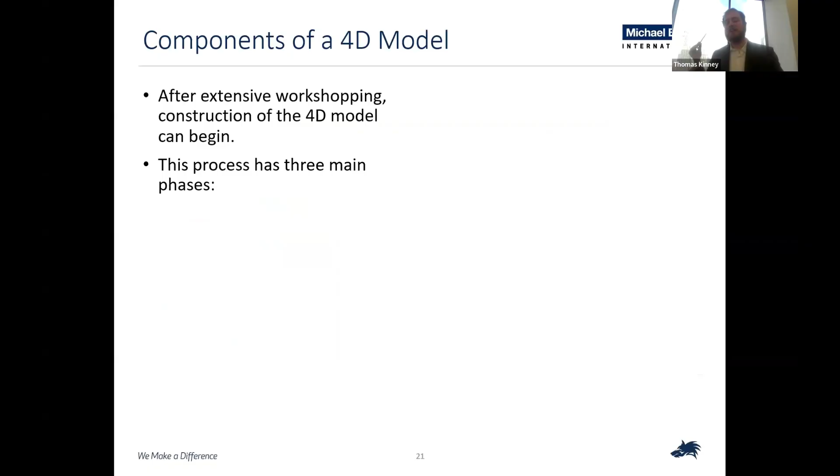After the extensive workshopping, construction on the 4D model can begin. This process had 3 main phases: first, the CAD diagrams based on the existing design plans distilled into models; then the action items and the schedule and task trackers are linked to the components of the models in Synchro 4D; then these action items are animated in sequence to show the change in the site over time.

This was designed specifically to aid in public-facing meetings, and we'll get more into that in just a second.

For the model, the existing CAD design is converted into a 3D model. For simplicity, this initial model was 2D line work. Each distinct construction activity was broken down into a line string or a cell for ease of association. So this is where the BIM comes in. Rather than breaking it down into, like a lot of structural BIM does, every bolt, every nut, every beam, we broke it down into more distinct sections.

As a hobby, I do model railroading, and I think of it this way: you have sections of individual track, whether it be a 9-inch straight piece or an 18-inch radius, 30-degree curve. Here, we just had, we need to build the track from station 25 to 35, so that activity is its own section of track in the model. Or we need to shift this track from here to here, from station 18 plus 57 to 21 plus 45, so that actually becomes 2 models where there's the existing track and then the track to be shifted.

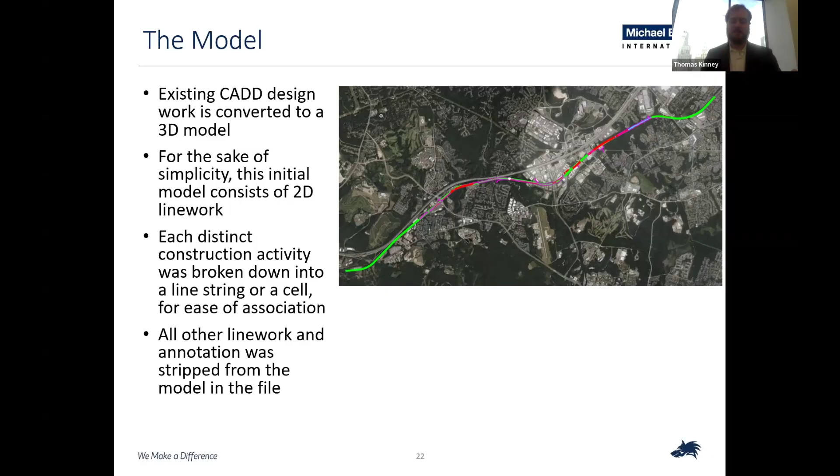Or the final location where that track is shifted to. And then all other line work and annotation was stripped from the model in the file, just so we can show those animations and those different tracks.

In Synchro 4D, each phase model was uploaded into the Bentley Infrastructure Cloud for use in Synchro 4D. The schedule prepared by construction services and Primavera was also imported into Synchro. And so we finally had everything under one roof.

Synchro operated by associating a resource, a piece of the model, with a schedule task, assigning it an appearance profile. That appearance profile allows us to show what's happening.

If a track's being installed, we can make it appear. If track's being removed, we can make it disappear. Track's being shifted, we do that with two different line strings - the existing track disappears and the new track appears at the same time to signify a shift.

It's just super handy that you can see how the project progresses over a certain phase. And we did this with each phase.

Phase 1 has its own model. Phase 2 has its own model where it starts like it looks at the end of phase 1, and it will end like it looks at the beginning of phase 3, just for instance. And so we animated those sequences.

Once the task, components, and appearance were established, the phases could be animated. Components of the construction were shown as put in service, taken out of service, installed, removed, shifted, or any combination of the above.

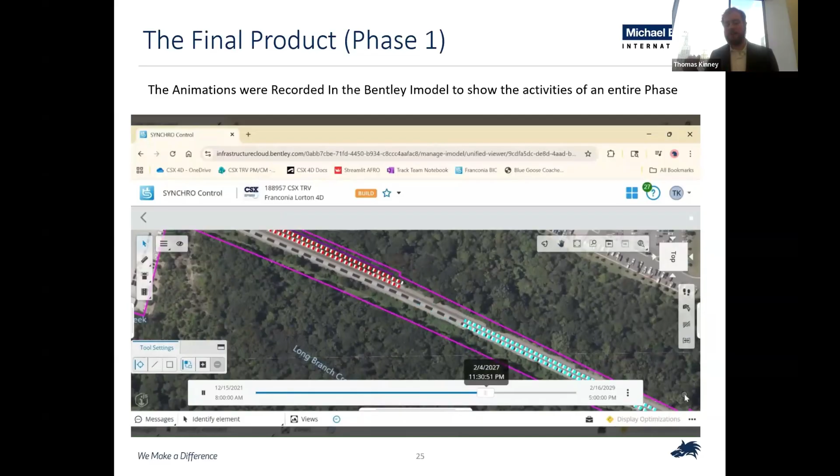This is a much larger shoofly where the tracks were being shifted rather than replaced. So we're shooflying around this area. We're going to put in a large bypass bridge here that will cut over from track 3 to track 1. That required some shooflying.

So that just kind of shows everything in sequence and in turn. And on the right, the bypass bridge is slowly fading into existence.

So those are the major construction activities of phase 1. We can just show that.

That makes it really easy to digest for people who are not necessarily industry specialists.

So what's next? All the phases will be animated much the same way I just showed you. And we're using the 2D model that we built as essentially a storyboard just to show that progression.

OpenRail Concept Designer is real nifty. It's a little out of my wheelhouse at the moment, but it's nifty, and we're exploring that to rapidly bring that 2D model to 3D without having to rebuild profiles and templates from scratch.

Synchro has another tool called Synchro Modeler, and we'll be able to parse our 3D model into the different tasks that we've discussed.

We'll even be able to do that non-destructively without destroying the original 3D model. Super convenient just to parse to allow us to do more complex animations.

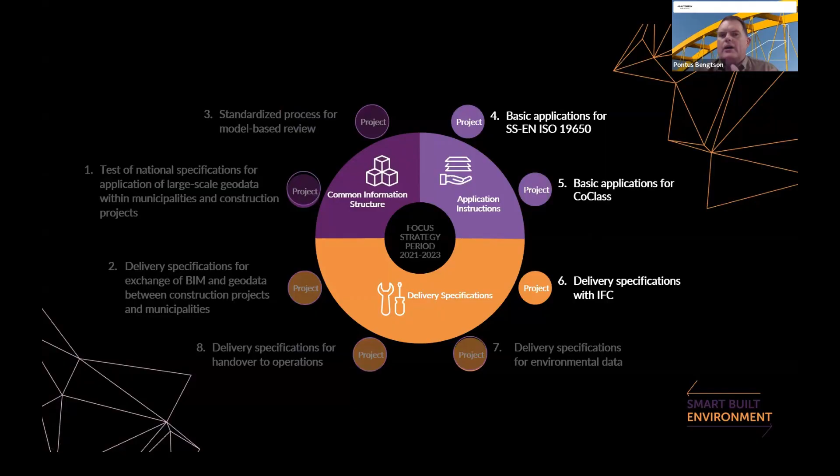Of these 8 projects, 3 of them were basic applications for ISO 19650, basic application for CoClass, and delivery specification with IFC. These 3 projects were bundled together and started as a project called BIM Guidelines.

I was in the steering committee for this work, but it was driven by the industry. We're quite good in Sweden in that everybody talks to everybody and the community is strong. Contractors, engineering companies, owners, and software suppliers come together and speak on common goals. We shouldn't actually compete against each other on things that would drive the country forward.

The project goals were to establish best practices, create user-friendly guidelines endorsed by the industry, and provide practical guidance, showing users how to manage digital information for everyday tasks, and to support implementation by developing material to help organizations adopt structured information management.

The core components were, as you saw, ISO 19650. There's a bit of, okay, how can we actually use that for the Swedish context? CoClass is a Swedish classification system, and how can that actually be implemented? And then, of course, IFC, which you all know what it is. This was the BIM guidelines.

As with these projects, it's always a challenge to get a nice report or result, but how do you actually maintain it and have it implemented and pushed out to the industry? In parallel, we've had BIM Alliance Sweden, a community industry organization, where the Swedish Building Smart chapter is under the BIM Alliance umbrella. Under BIM Alliance, we now have in Sweden something called Praxi.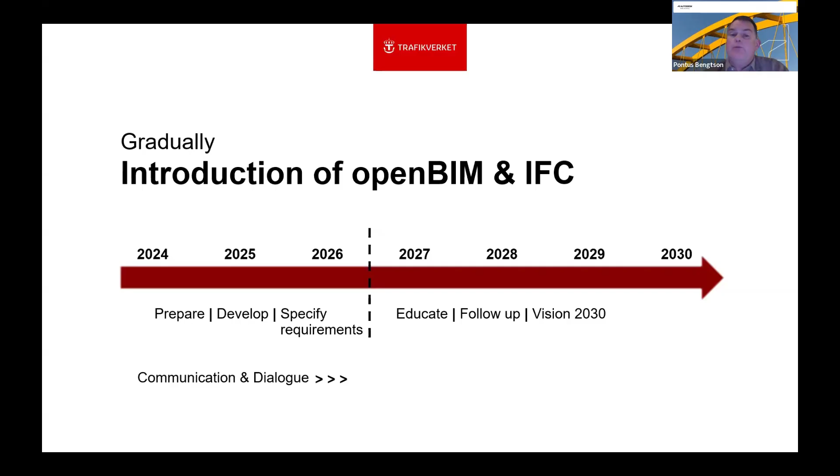And as you can see down at the bottom, communication and dialogue are key words here. And I must say, they are really good at communicating with the industry in different forums, under the Building Smart umbrella, in BIM Alliance, and other meetings. And yesterday we actually had a conference on this, where 100 people came.

And they are now going into this kind of first information request, and they have some metadata, coordinate system, spatial structure, and so on.

And what they actually did was they wanted to pressure test a little bit. Where is the industry? How prepared are you? If we would start to require this for real, not just want an IFC, but really this is the information we want, it should be in this structure, these are the objects, all that kind of thing.

What would happen then? So they actually had an industry challenge where they put out a really simple IDS, just a slab with some requirements on the coordinate system, some of the classes, and so on. This should be what should be on it and information and so on. And then they said, hey, suppliers, and engineering companies, please, if you have, could you test and send in IFC and your comments and thoughts? And so they actually got 11 answers on this.

And as it was no competition, so they didn't present what kind of tool worked or didn't work, but it was more like, okay, we did this, it's a massive challenge with the coordinate system, that's a really, really tough nut we need to crack. And then there were some other smaller things, but really good.

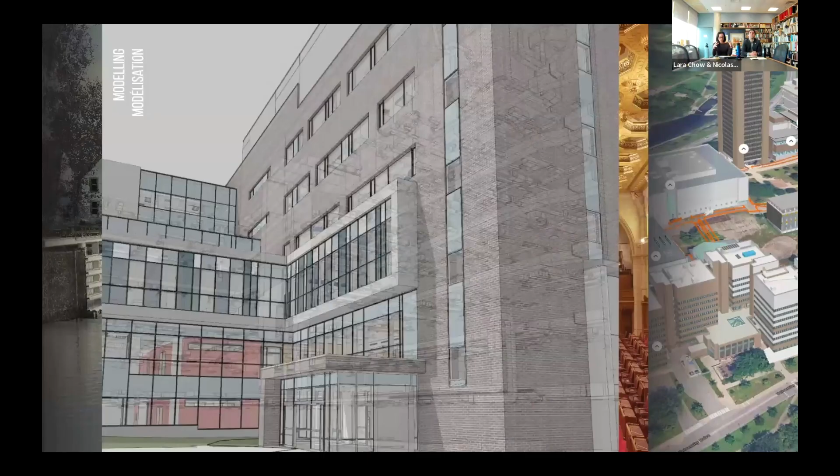So we have 5 streams of research. The first is digitization, where we translate the physical world around us into XYZ coordinates using laser scanning and photogrammetry. We then take that resulting point cloud data and other sources to develop building information models. We're particularly well known for heritage building information models.

Next we have digitally assisted fabrication, where we use digital technology to augment traditional workflows using robotic and CNC milling—we have 2 robots at the School of Architecture. Digitally assisted storytelling is where we create engaging public experiences using these digital assets, such as online tours, virtual reality, and augmented reality experiences.

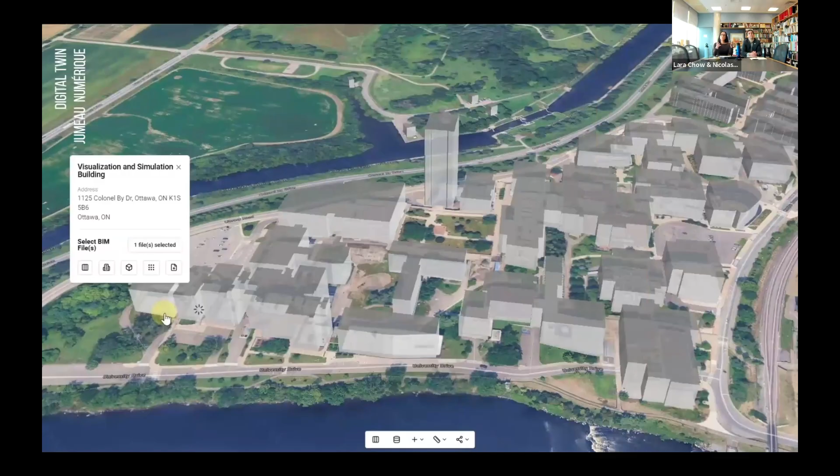And our 5th stream of research is something we've been working towards, as Nico said, for the past 15 years, starting with large-scale urban modeling that then moved into dynamic representations of the built environment into digital twin.

So the team that's working on our digital twin platform is about 8 students, mostly undergraduate developers led by Nico, Steve, and myself. The majority of the platform you'll see here today was developed by this team over 24 months, but it builds on a foundational research project called Imagining Canada's Digital Twin, where we were awarded a New Frontiers in Research Exploration grant.

Before we jump into the platform itself, I'll talk a little bit about how we define what a digital twin is to us. There's many definitions of digital twins, and ours is based on one by the Digital Twin Institute. Its director, Michael Grieves, states there's 3 components to a digital twin: you have the physical thing in space, then you have the virtual version of that product in a virtual space, and then you have a feedback loop going between the two.

This is fairly straightforward when you start to think about maybe a digital twin of, let's say, a jet engine. But once you start to think about a digital twin of Canada, which is quite large, it gets to be a lot more complicated.

So for CDT, we're trying to capture the physical environment. Here you see the physical Canada, and that includes the physical people, the built environment, the natural environment. But we're also trying to capture some of the non-physical networks and processes, so we have the history and culture of Canada, government jurisdictions, climate, environmental systems. And then you have a digital transformation that occurs that basically translates all of that into data.

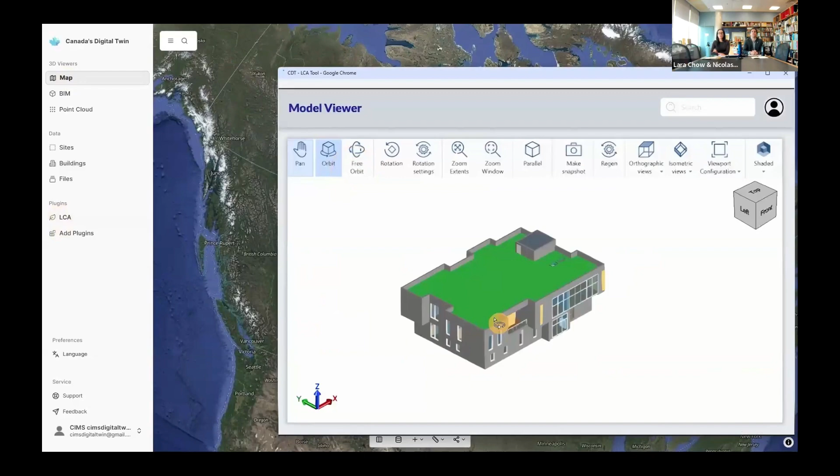The toolbar also houses integrated tools. This includes the National Research Council's openBIM LCA plugin, which uses IFC-based workflows for carbon benchmarking and automated model verification throughout a building's lifecycle. This integration is essentially to demonstrate how our digital twin platform can create a unified, open standard-based ecosystem of analysis tools. We'll provide the base, and then experts will come and create tools that can do analysis on top of the platform.

So let's explore our site database. Here, for example, Carleton University, you can see all of its associated buildings and any attached files. Once we jump into our buildings database, you can filter and query the data.

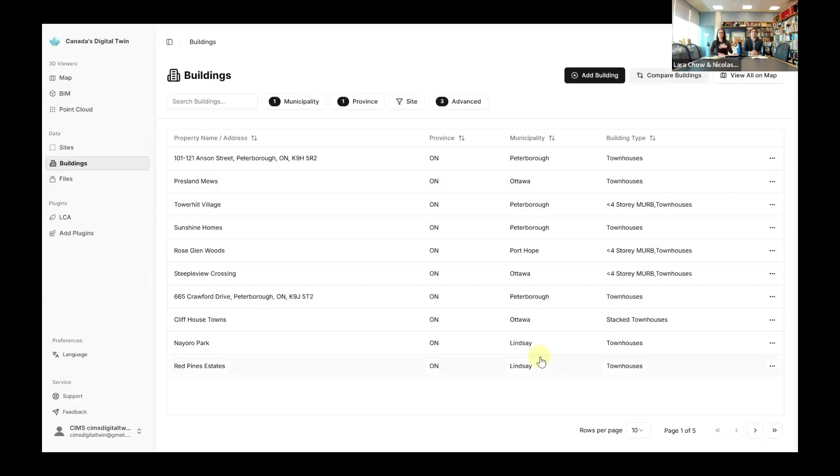This is all based on standardized properties. For example, here we're searching by building type and year of construction, and then you can filter down your database. Now jumping into a specific building, we have these data tabs on the left, and this is all standardized using the Building Smart Data Dictionary to develop these properties, ensuring alignment with open standards.

So all this information is editable like a form, but we're also researching how to pull that information directly from the IFC and the GIS data into those data tabs. For example, you can also get information from operational sensors as well for energy data.

Now we're in the attached files tab. Here you can see all of the files attached to this one specific building. You can essentially attach any file type, but you can also preview them as well. So you can attach reports, multimedia, things like that.

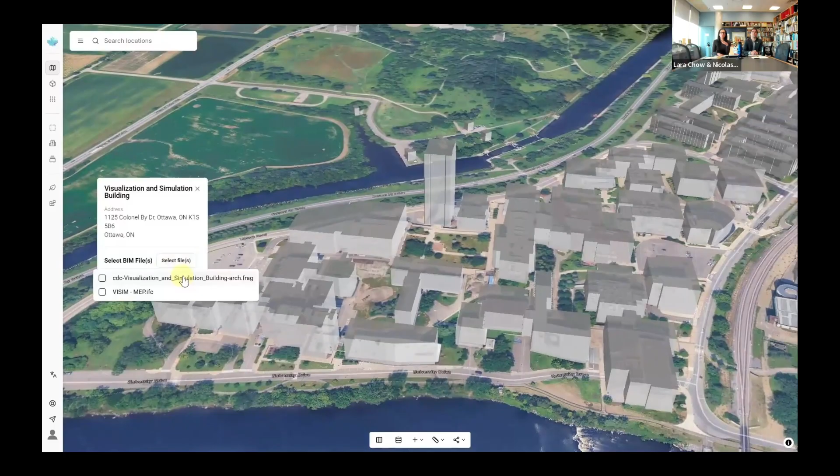Now let me demonstrate what we consider our most significant technical achievement, which is seamless BIM GIS integration. Here we've modeled all 45 buildings on campus at Carleton University, and we've loaded them all into the platform. As we add them, they load within sub 2-second performance, and some of these models are over 500 megabytes.

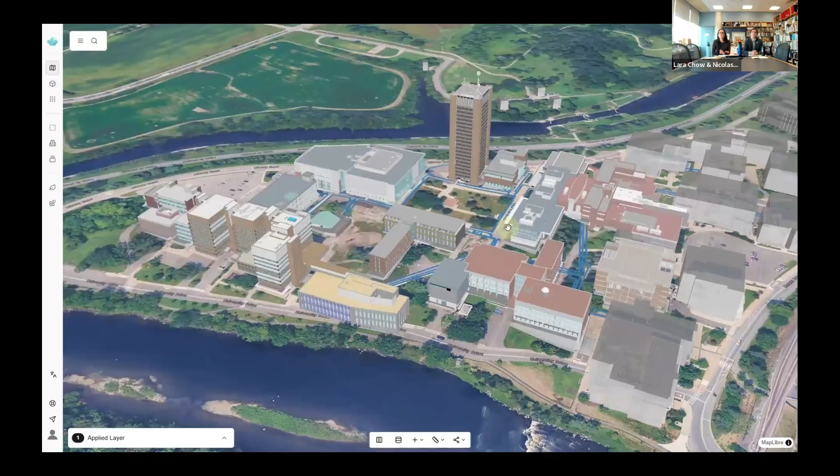At Carleton University, we also have a very extensive tunnel network connecting all of our buildings. So we're going to add in some GIS information showing the tunnel network, which shows how you have building scale and infrastructure scale information coexisting within an integrated environment. Here it's now opening up the BIM viewer for the tunnels, so you can isolate the BIM and bring it into the viewer, and Nico will also show some tools when we demo the BIM specific tools.

We're also able to add images, comments, models, videos, any type of media really to the map viewer for enhanced collaboration. So here we're just adding a couple images of the quad.

Now zooming out to Ottawa, I'm going to demonstrate our Open Data Federation capabilities. The platform automatically retrieves open government data, and here we're going to add Ottawa neighborhoods, transit stops, as well as national airport locations. This integration happens through standardized APIs, so there's no data manipulation required. We currently federate over 60 sources coming from Natural Resources Canada, Statistics Canada, as well as dozens of municipal open data portals, making previously inaccessible data sets easy to layer and visualize alongside your own building information.

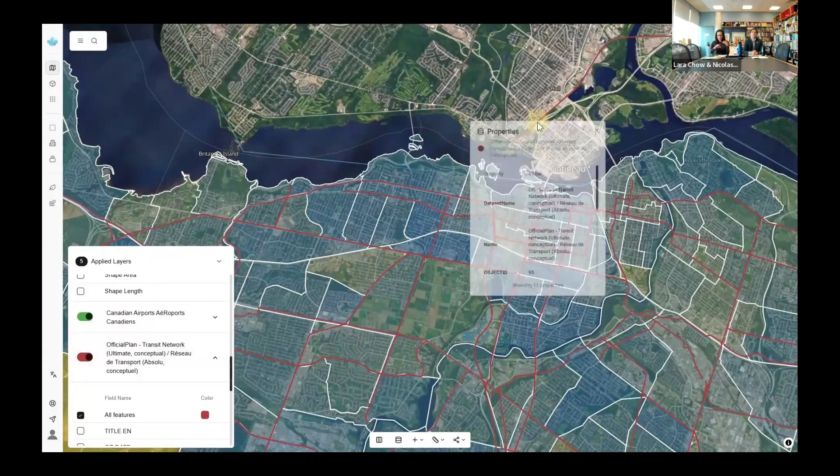This dynamic visualization control, called the Applied Layers toolbar, allows users to adjust color scales and graphic quality for enhanced analysis. This transforms fragmented government data into actionable intelligence for asset managers, supporting data-driven decisions for all users.

You can also click on each one of the data points, whether that's point data or polygonal data, and you can see all the metadata that's associated with it.

Going back to the BIM viewer, that is probably something people will resonate with because of the openBIM standards. So here we go to one of those buildings that Lara was showing before. They are not abstracted versions or shells, it's the entire IFC, many gigabytes of IFCs that live on this campus. You can see everything inside, and they load really fast compared with how they take time to load in some proprietary software that we use.

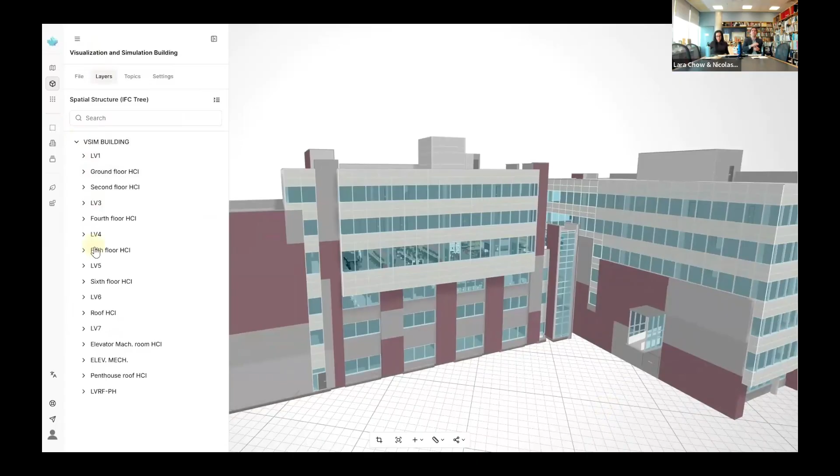You can generate floor plans, see all of the files attached, and see the entire IFC hierarchy or IFC tree with all of the elements that had been modeled in authoring. You can click on them in this sidebar, or click on them in the 3D viewer, and retrieve all of the metadata, which is the most important part of BIM. So you have identity data, dimensions, constraints, phasing information, property sets created in authoring, and all of that you can retrieve within the BIM viewer.

You can also add other types of multimedia. For example, CAD is still really important for our industry, and you can use that as a reference for your BIM in the same scene. You can add 3D models, many types, GLTF, FBX, Collada, you name it, and we have this feature that allows you to place the model, rotate, scale, and add that into your own workflows.

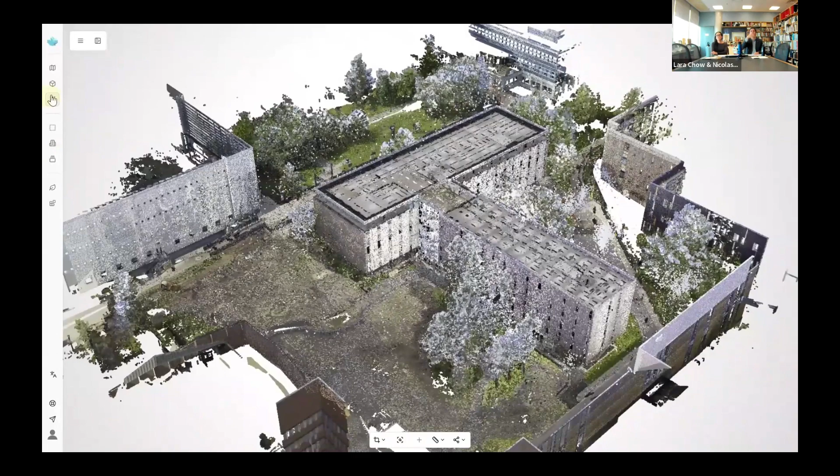We also have point cloud integration. For example, this building here that we scanned, 3D scan, and then turned from point cloud to BIM, you can see it on the BIM viewer. This is also using Three.js, so let's take you back to the BIM viewer.

You can start exploring the BIM, cutting a clipping plane to go inside, identifying that, for example, this object has been misplaced. So I measure and add a comment to communicate this to other team members.

But of course, we are talking about open BIM standards here, so BIM Collaboration Format, or BCF, is the right way of communicating this information. You identify this topic or issue, and then create the right BCF topic in order to communicate that. You can also import a BCF with all of the information I mentioned before, assigned to the date, the stage, the priority, all of that, and you can see that including the viewpoint.

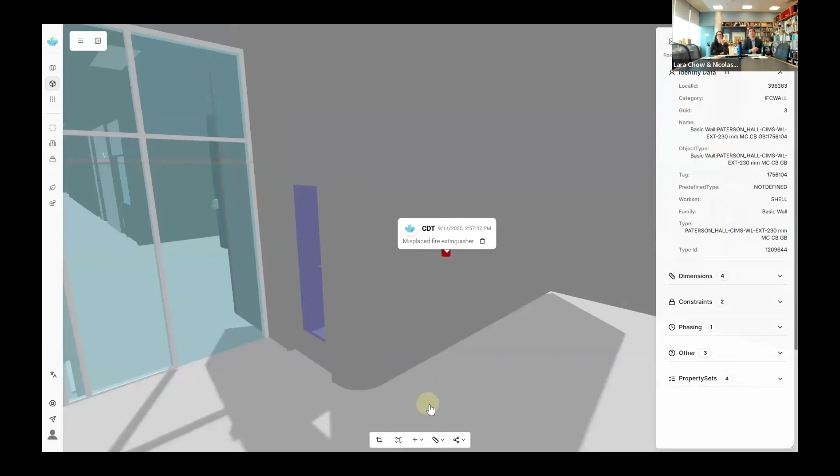So you can see and retrieve that exact view where that topic was created. And of course, you can share that as a QR code or as a URL with other team members.

The other standard is the Information Delivery Specification, or IDS, which is very important for us to validate the models. You can load the IDS in the BIM viewer and quickly verify which elements comply or do not comply with the requirements set in the IDS file. You can see that both in the data or in the 3D viewer to get that information and validate it, then share that information easily with other team members.

So that's pretty much what we have in the BIM viewer, with everything really integrated in the GIS scene. That's what we have right now. We're working on a lot of things in the roadmap that we're really happy to integrate in the next couple of months.

So what you've seen today represents more than a technical platform. It's a demonstration of what's possible when a group of individuals commits to pushing open source technology to transform infrastructure management at a national scale.

And we recently won the Professional Research Award at Building Smart International, which is very exciting. The next exciting thing, as Nico mentioned, is the beta release, which we're scheduling probably at the end of December. This will make the core technology of our platform accessible to the broader community.

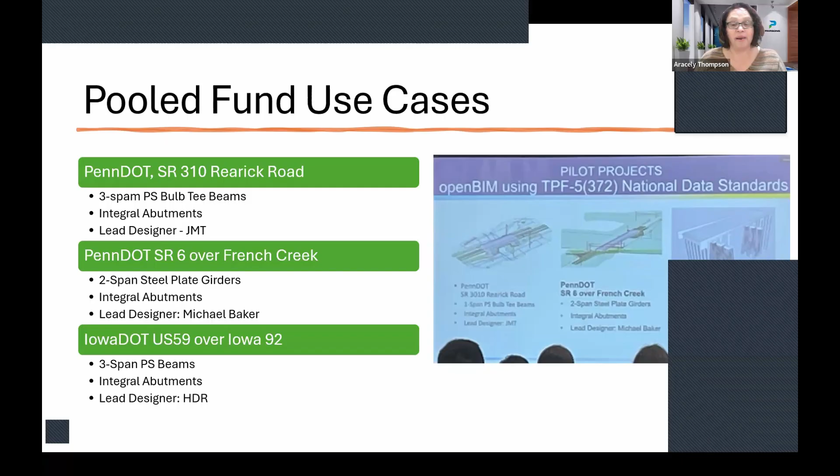So 3 of the use cases discussed at the summit were: 2 from PennDOT and 1 from Iowa DOT. Obviously they're all based on bridges, similar in size, not too complicated, 3-span, with abutments. All 3 of these use cases used Bentley products to produce the bridge.

The goal for the use case was to deliver an IFC federated model with 2D documents. That was one of the goals. The second was model as a legal document, meaning rather than delivering PDFs and CAD drawings, you'd deliver the IFC model, and that would be considered your legal document. Within that, there would also be 2D views to help understand some of the construction aspects of the project.

Some of the challenges all 3 use cases saw was in using Open Bridge Modeler, they found limitations in the capabilities with object classes. There were challenges when exporting the model through IFC, and they used IFC 4.3 for these exports. The models were not clean, so they had to use outside tools to clean up the models and edit these IFC models to meet the deliverable.

Bentley worked with all 3 of these use cases in helping them extract the data out of the software, and they also made upgrades to their software. But the key point here is the upgrades were only made to those working on the pooled fund use cases. They didn't push those updates across to the entire platform, so whatever was customized was customized only for those working on that pooled fund use case.